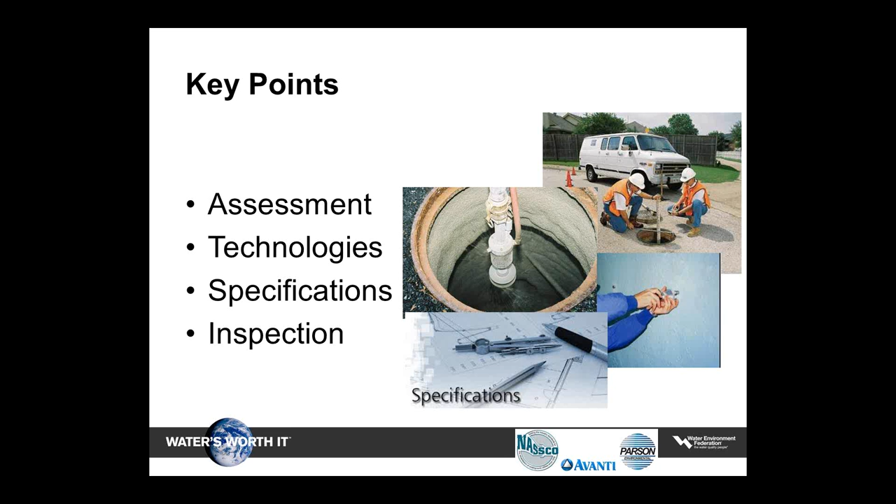That will be followed by 4 experts in manhole rehabilitation technologies to discuss some of the predominant rehab technologies available in the market today. We'll then move to the importance of good manhole rehab specifications, emphasizing some of the important components of a good specification. Now, following this webcast, you'll be provided instructions on how to download your own free copy of NASSCO's specification guidelines, which was developed by our own Manhole Rehabilitation Committee, some of which you're going to hear from today. And finally, the perfect specification is really not worth the paper it's written on if it's not thoroughly executed. So we'll wrap up the webinar with a presentation of key components of construction inspection for manhole rehabilitation.

Now, our presenters this afternoon will include John Schroeder from CDM Smith to discuss manhole assessment. For manhole rehabilitation technologies, you'll hear from Frank Aguilar from Avanti International, Craig Gall from Parson Environmental Products, Jim Creed of Sherwin-Williams Company, and John Manajak of National Power Rodding, a Carylon Corporation. Tim Back from Back Municipal Consulting will discuss the specification guidelines that were developed by NASSCO's Manhole Rehabilitation Committee under his leadership. And finally, Gerry Muenchmeyer, NASSCO's Technical Director, will explain some of the unique inspection techniques that are required for successful manhole rehabilitation projects.

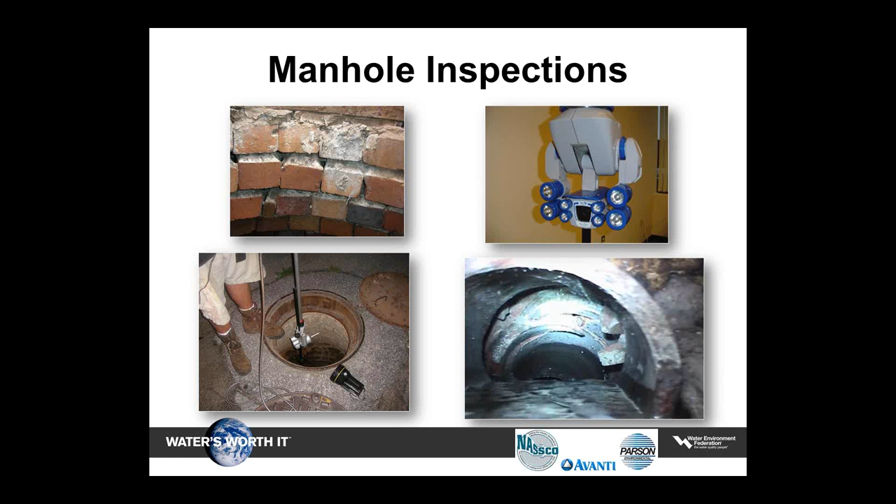As with everything else in the trenchless industry, it's constantly changing, and there's new and innovative trenchless technologies that come out every year that allow us to collect better, faster, more detailed data. And what you see here is just some different snapshots of pole cameras that allow us to collect video and/or photos of the manhole, as well as zooming up inside the pipe. And I personally have used these types of technologies, and it gives us sometimes a good snapshot, zooming up the pipe to see if that pipe is open or clear, or maybe that's blocked or has too much flow in it.

Another technology that has really come a long way in the last couple of years are these panoramic cameras. It allows us to do a very thorough and quick inspection in less than 5 minutes of the entire interior of the manhole, and we can then take that information and actually do full-blown level 2 MACP inspections back in the office, where we complete all the fields by entering all that information into the computer. Again, in 5 minutes you can collect all this information, the video, and then take that information back to the office.

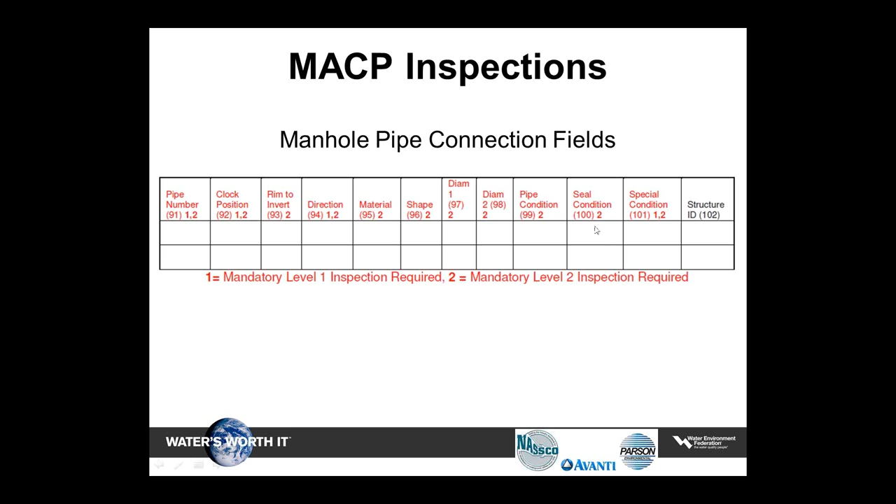The next information that you may collect, especially when you get into level 2 inspections, is information on the pipes coming into and out of the manhole. So we're going to collect information like the clock position, the depth or rim to invert, the material of the pipe, the shape of the pipe, diameters, some general condition, is it good or is it bad, and any type of seal condition.

The defect coding, as I mentioned, we've taken the PACP and really are reusing almost all of the codes that you would see for defects within a pipeline and using those same codes for the manhole. So things like infiltration runner is IR and missing mortar, and we're using those same types of code all the way from the top of the manhole at the cover all the way down to the bottom, which is the channel. And then we also use abbreviations for the cone and the wall and the channel. So we are using those abbreviations to complete this type of defect coding information. And then we will also identify severity of the types of defects and the clock position within the manhole.

So with that information that we're going to collect, we're always trying to figure out, okay, does this manhole need any type of improvements? And if so, what might those improvements be? Also in the field, we utilize a lot of other types of technologies like handheld GPS data collectors that we can pre-populate inspection forms that we can just basically have pull-down menus. We can collect XY coordinates of the manhole location, which we can bring back and put that into our GIS. And we can rapidly collect all this information in 10 to 15 minutes per manhole.

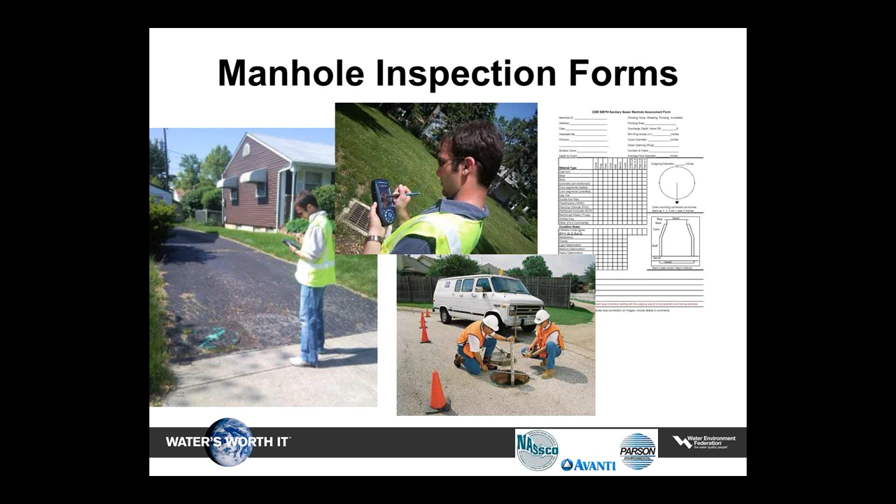Here's a couple of sample manhole inspections that we've done on some recent projects, and I'd like to again reiterate that each project's different. The information that you may need is different, and the MACP kind of gives us just some basic fundamentals of the fields and standardization of an Access database that we can collect all this information in a standard form. Here's a snapshot of some basic information of we're collecting any infiltration, the material, the dimensions, some condition information, and then we typically take several photographs that we can put into this form, and then we can have one file that may be used to, say, link to the GIS. It's important to be able to collect this information efficiently, so that's really why we've collected these pull-down things. We can check off what the material and condition is for each component of the manhole.

The information you might get with a MACP database, an Exchange database, there's a lot of information that's collected, and you're going to get this type of information. Here's a sample MACP Exchange database, and the key table that you get, all these are individual tables, but the key table that you're going to have all your summary information is the manhole inspection table.

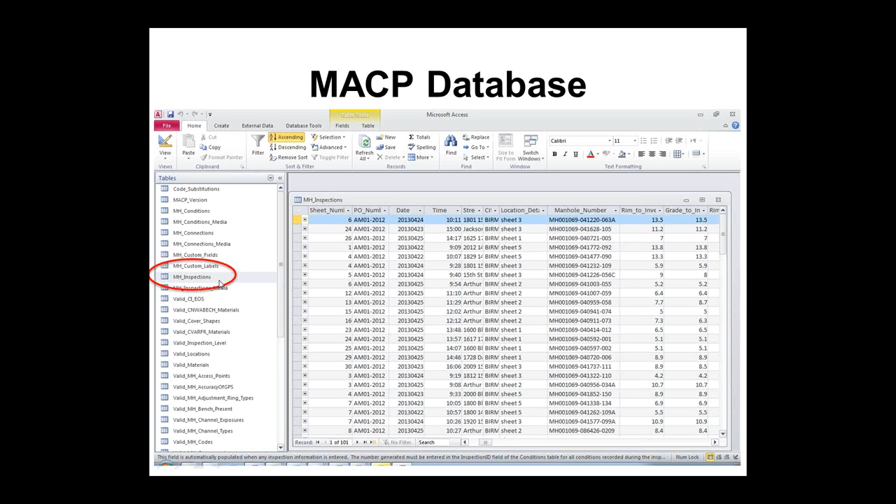Yeah, thanks a lot, John. In this next segment, you're going to hear from 4 industry experts in manhole rehabilitation technologies. Now, the first of our speakers will be Frank Aguilar, Vice President of Operations and Customer Service at Avanti International. He'll discuss chemical grouting in manholes. Frank has experience with R&D, technical support, vendor management, and international sales. He also speaks 4 languages fluently.

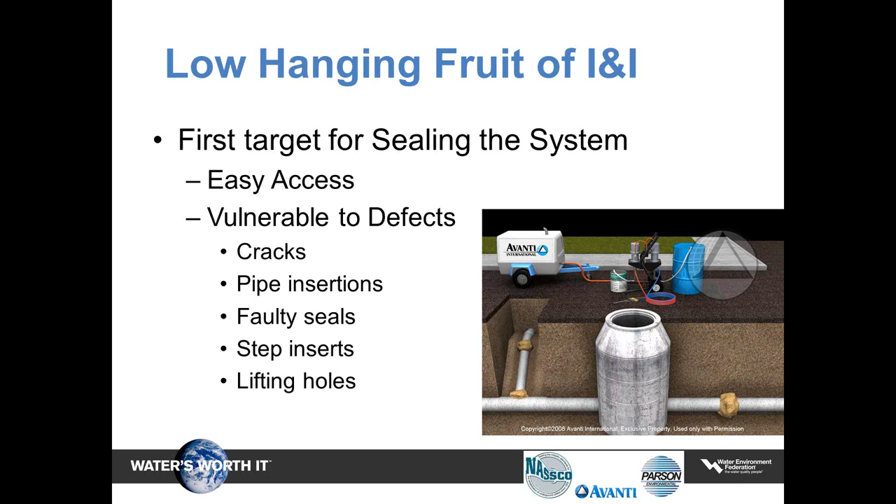The main types of manholes serviced by chemical grouts are brick and mortar and precast manholes. Over time, the mortar slowly erodes away, exposing the manhole to leaks. And in the precast concrete manholes, the gaskets are rolled or torn during installation, creating an entry area for infiltration.

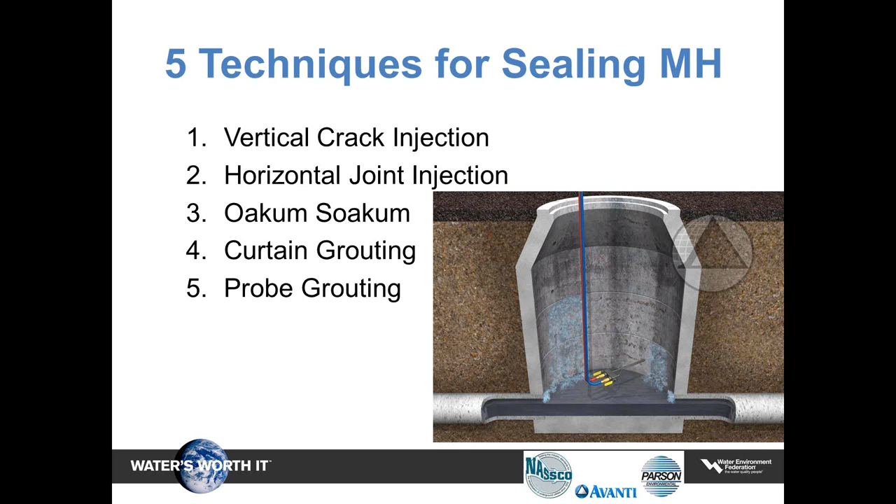Let's review a number of techniques for sealing leaking manholes: vertical crack injection, horizontal joint injection, oakum soakum, curtain grouting, and probe grouting. The following animations will help us understand what can be done to stop leaks in a manhole permanently.

In this vertical crack injection animation, you see the leaking manhole, you see the water coming in, you see that injection holes are being drilled from typically the lowest point. You drill at a 45-degree angle toward the crack, a distance off the crack equal to about half the wall thickness. You would typically drill on either side of the crack. You would then flush the cracks with water to remove any debris and then install the injector.

The injector is placed and tightened into the wall structure. Using a grout pump, you set the pump at its lowest possible pressure. Then you would connect the coupler to the injector. You would begin pumping grout until the crack stops accepting the material. The process continues. He works his way up. As you can see, the water is slowed down until there is no more water coming through the manhole wall.

In the horizontal joint injection animation, you see the leaking manhole. Injection holes are drilled in a horizontal pattern. You would then again flush the cracks with water to remove any debris and then install the injector. You're not trying to drill all the way through the structure wall, so again, keeping in mind the thickness of the wall is important.

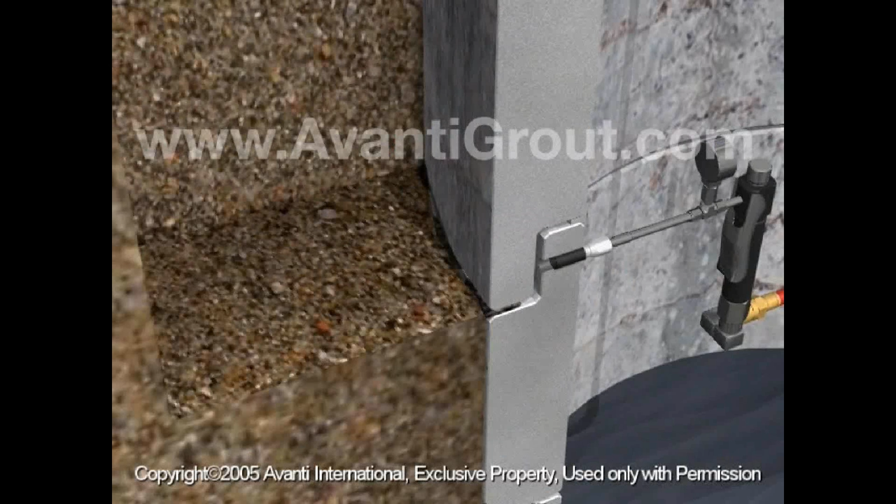You would then install the injector in place. Using a grout pump, you would set the pump at its lowest possible pressure, then connect the coupler to the injector. You begin pumping grout until the area stops accepting the material. In the final phase of the animation, you see the grout traveling. You see the next grouting area being injected, and you see the grout travel to the other side.

In the oakum-soakum animation, we see a wall that is leaking. You see the oakum rope and you see the grout pail. Typically, the grout is mixed into the oakum rope to keep the grout in place as you put the mixture into the leaking area. After you place it in the leaking area, the material will expand, it adheres, and compresses against the sides of the structure, stopping the leak.

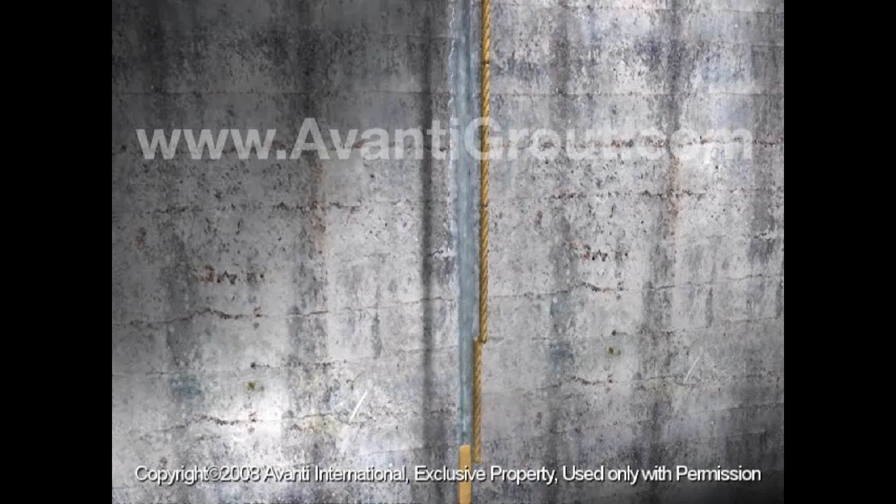Sometimes the manhole has too many leaks to effectively treat each individually. In that case, it can be curtain grouted. In the curtain grouting animation, we utilize a brick manhole that is leaking. We observe a grout probe that is injecting grout all the way through the manhole wall out into the surrounding soil. The process is stabilizing the soil and creating a permanent curtain outside the underground structure.

The process is continued again from the lowest point up, and you see in the animation how the grout is forming a mixture with the soil matrix, stopping the water.

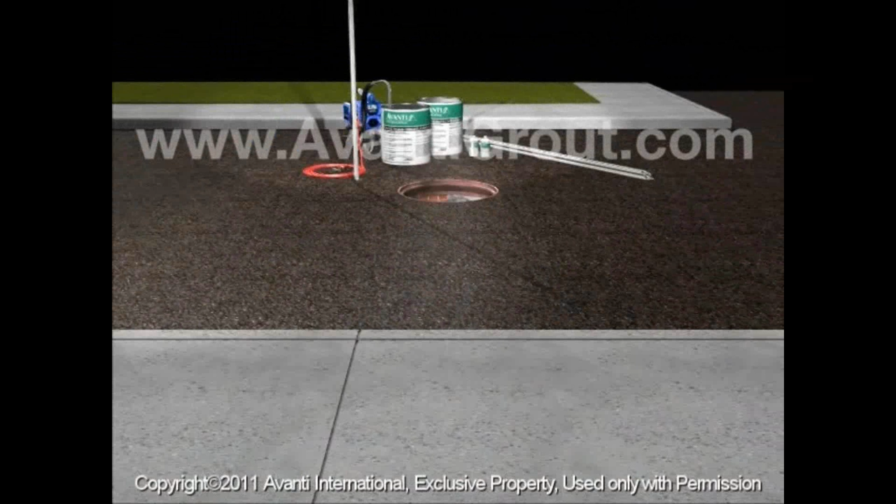The last technique we will review is probe grouting. This approach may be warranted if there are too many types of utilities in the manhole, say, or if you have very limited access. The animation shows how a contractor may perform the work in a brick manhole. The probe may be jetted with water pressure or high pressure air to the depth desired.

Install all probes in the area to be grouted. Ensure that the probes are fitted with the appropriate fittings for a proper connection. Each injection pass will receive about 1/4 gallon of material depending on the soil type. After the desired amount of grout is injected, stop pumping and pull the probe up approximately 2 feet. Inject again using the same technique. Continue the process until the probe is within 3 to 5 feet of the surface of the ground.

These techniques are at times the first wave of defense before other technologies can be used. Today we've reviewed techniques which are long-term solutions for leaking manholes and our aging infrastructure.

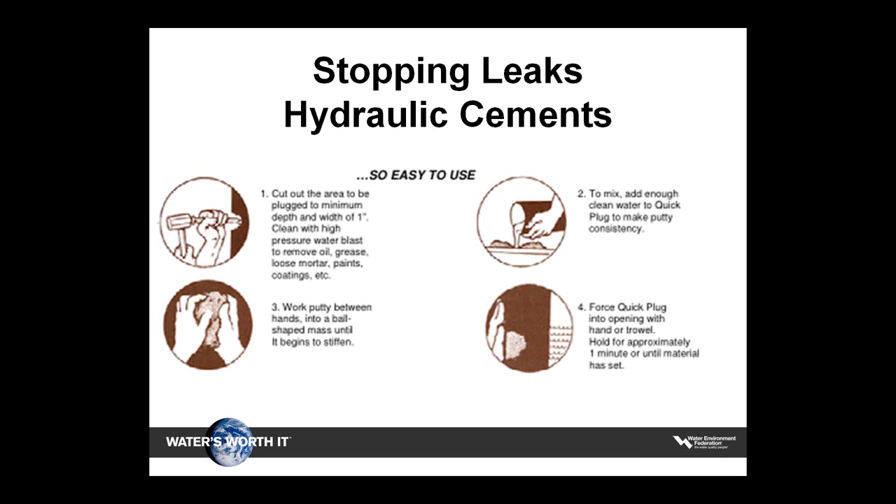Cementitious patching materials can be used to fill in gaps, voids, or holes that may be excessively deep prior to installation of the cementitious lining. Most of the manufacturers offer this type of product that is compatible with their lining material. This is an important point to consider when placing more than one surface bonding product in the same manhole. Set times for patching materials are usually in the 30-minute range.

Cementitious lining materials designed for manhole rehab are typically manufactured from either Portland or calcium aluminate cements. Even so, all of the products using either type of cement are designed to provide structural integrity, protection against future infiltration, and corrosion resistance of varying levels, which we will discuss later. Compressive strengths are typically 4 to 5 times greater than the existing manhole substrate, which will return the manhole to better than new condition by providing a higher level of structural integrity. They are usually fiber reinforced to aid in resisting surface cracking and require around 1 to 1.25 gallons of water per bag, with bag sizes ranging from 50 to 75 pounds.

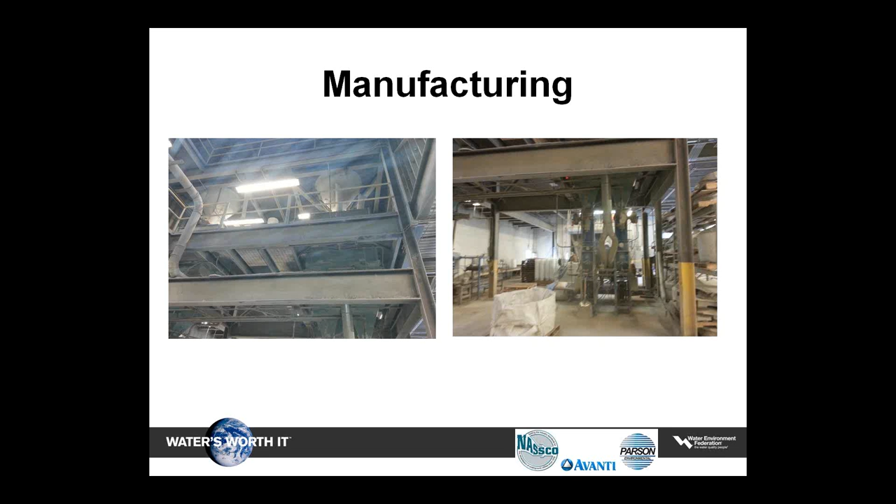The products have very good adhesion to the manhole substrate, along with internal cohesion that allow for vertical and overhead applications without the use of wire mesh or other supporting materials. Each manufacturer has their own design philosophies, which are reflected in their proprietary formulations that determine how their particular product will mix, spray, and finish. However, the products manufactured within each cement group will typically possess similar physical properties and long-term performance. Just as Fords and Chevys are manufactured by different companies and take their own approaches to certain aspects of their vehicles, they're both designed to get you from point A to point B.

Wet shotcrete spraying, either by gun or spin caster, is the most common application method for these products, but most can also be applied by trowel if necessary. Recommended application thickness is a minimum of 1/2 inch, which can be increased depending upon the product's capabilities, along with engineering design parameters that may be part of the project specifications. The products are finished using a steel trowel to compact the material and close up the pore structure. A subsequent brush finish is optional and may be performed if desired.

Common types of these products include Portland cement with aggregate, which is typically a fine-grained sand; calcium aluminate cement with select aggregate; calcium aluminate cement with calcium aluminate aggregate, which is referred to as clinker, and it is a byproduct from the processing of the calcium aluminate cement; and also Portland or calcium aluminate cement-based products with a liquid additive to prevent growth of bacteria that causes microbial-induced corrosion, or MIC.

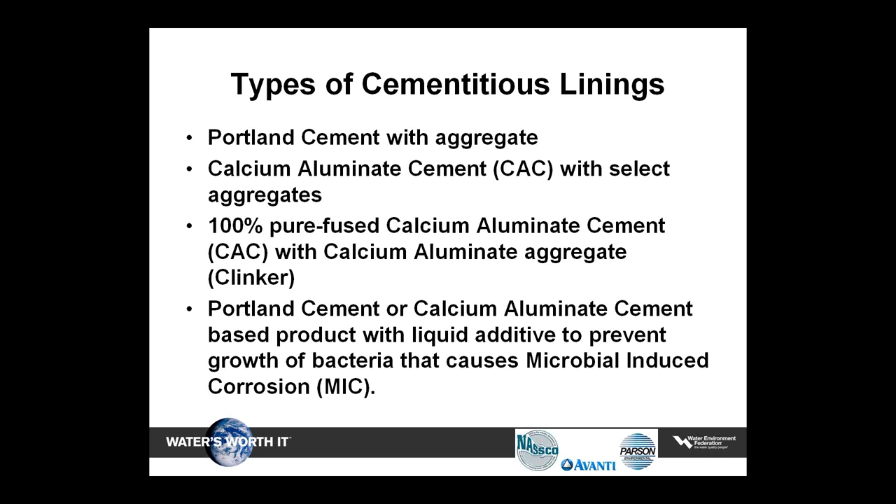Portland cement-based products will usually exhibit the longest working times. This type of product can typically be applied at a thicker rate per coat than calcium aluminate-based products. The 28-day compressive strengths are typically a bit higher than the calcium aluminate materials, which gain strength much earlier in the cycle and then tend to move upward more slowly.

Portland cement-based linings may be the most commonly utilized cementitious linings due to a lower cost, acceptable corrosion resistance for a majority of environments, and a more user-friendly application due in part to the extended working times.

Calcium aluminate cement with select aggregate products usually have a reduced working time versus Portland cement due to the increased internal heat that is naturally generated by the calcium aluminate cement. And as the ambient temperatures increase, that working time may be reduced even further. Corrosion resistance is enhanced to a moderate level, and it is usually at a mid-range price point. These products tend to be a little more difficult to handle versus Portland cement due in part to working time constraints, but factory-trained contractors are capable of installing the products properly.

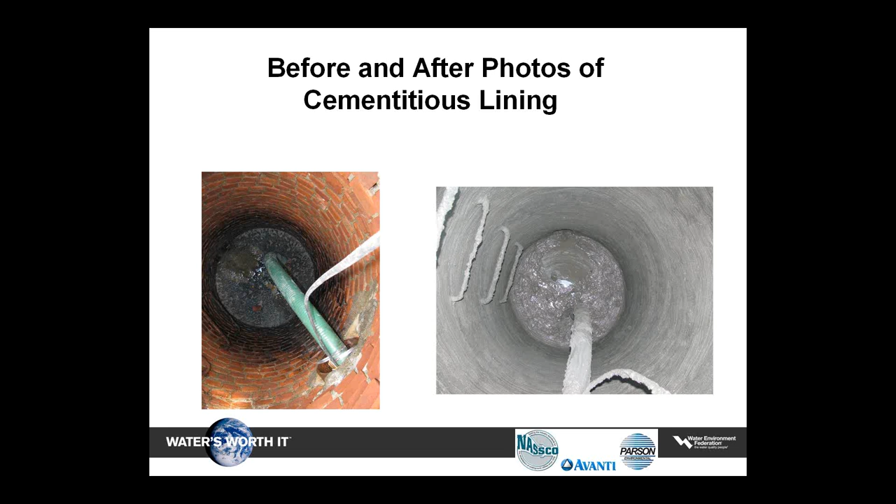100% pure fused calcium aluminate cement with calcium aluminate aggregate products arguably have the highest resistance to corrosion due to the addition of calcium aluminate aggregate, which is much harder than sand. The product has similar working time characteristics to calcium aluminate. There are only several manufacturers that can provide this type of product, however, as calcium aluminate aggregate is difficult to obtain.

Portland cement or calcium aluminate cement base with a liquid additive introduced during the mixing process can eliminate the growth of microbial-induced corrosion, or MIC, which is a primary cause of corrosion in manholes. It guards against the growth of mold, fungi, algae, and other unwanted bacteria, which in turn does not allow damaging sulfuric acid to be produced. Also, it remains a permanent part of the concrete matrix.

Famous concrete structures include the Hoover Dam, the Panama Canal, and the Roman Pantheon. The earliest large-scale users of concrete technology were the ancient Romans, and concrete was widely used in the Roman Empire. The Colosseum in Rome was built largely of concrete, and the concrete dome of the Pantheon is the world's largest. After the Roman Empire collapsed, use of concrete became rare until the technology was repioneered in the mid-19th century. Today, concrete is the most widely used man-made construction material.

Sprayable high-build cementitious linings have revolutionized the manhole rehabilitation industry over the past 25 years or so and taken it to a new level of long-term sustainability. Providing structural integrity is becoming more and more important as our already old infrastructure continues to age. Cement has been used in some of the world's oldest structures that are still standing today. Manholes lined with any of the cementitious products discussed here today should be around long after all of us are just a memory.

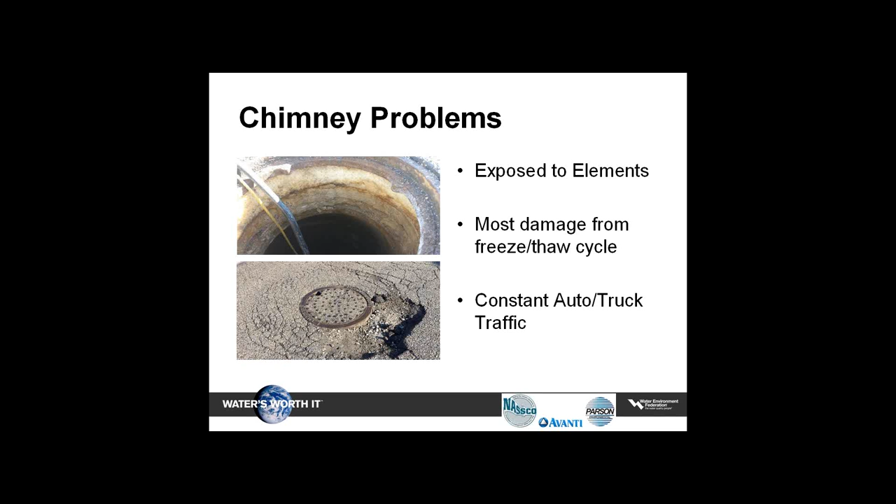Our most common problems occur because the chimney is so close to the surface. Chimneys and the material that makes up the chimney are exposed to the elements, especially when we have an open grate manhole cover like those that are used in storm inlets and catch basins. The chimney is where we find the most damage from the freeze-thaw cycle. Manholes located in the streets experience damage to the chimneys from the constant pounding from car and truck traffic.

With the constant pounding of traffic and the yearly freeze and thaw cycles, chimneys are prone to infiltration because of the breakdown of their material. It is said that about 50% of the initial inflow from a rain event occurs at the chimney area.

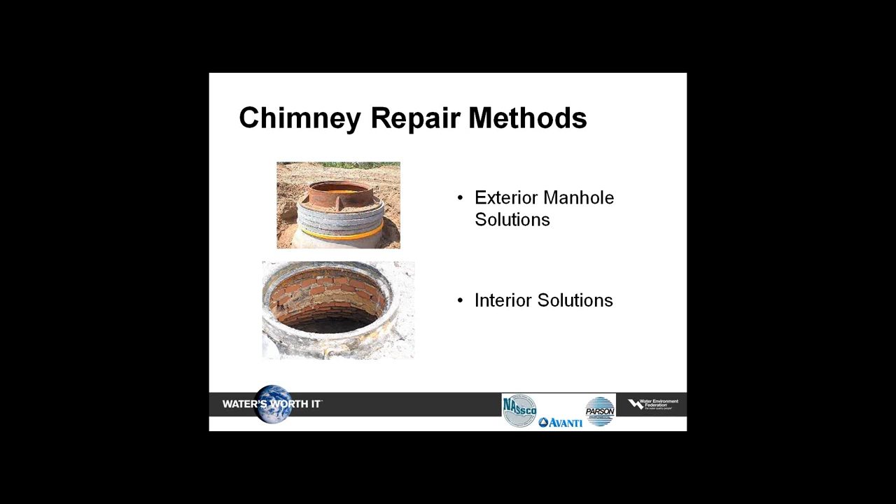Chimney repairs can be categorized as either exterior solutions or interior solutions. Exterior solutions require an excavation, or they must be installed during construction prior to leveling the surface. The interior solutions, or ones that don't require a dig, can be installed from the surface, and about 75% of the time they do not even require a manned entry.

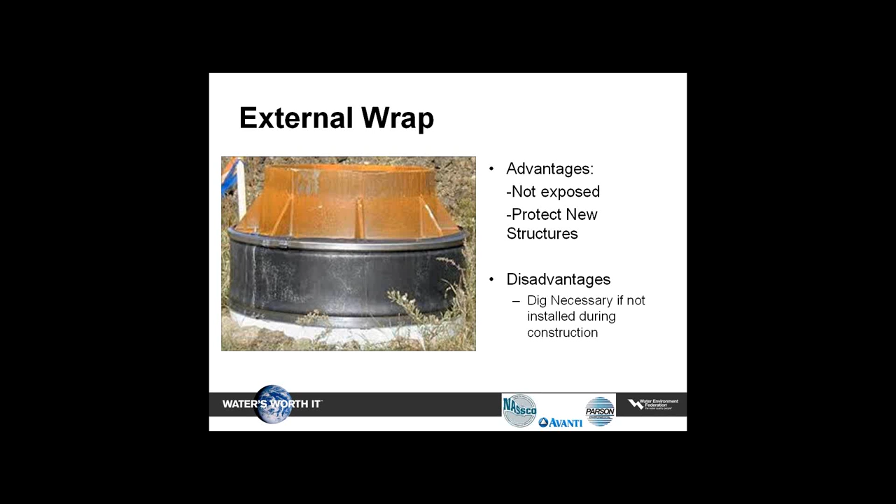The external wrap is best installed when adjusting frames or during new construction. These help protect from infiltration from the outside and are held in place by the metal bands.

Moving inside, the first thing that I think about when I hear about a chimney seal are the internal boots. This is a rubber ring of various diameters that is installed against the frame and extends downward to the corbel area. They're held in place by stainless steel bands that lock in place. They are best used if you have a fairly even ring size for the length of the chimney. However, they do give you a little bit of stretch. So if you have a 22-inch ring and a 23-inch ring in the same chimney, the boots will be able to cover both sizes.

Chemical grouting is performed in the same manner as manhole grouting. The operator will drill through the wall and inject the chemical grout to form an external chimney seal. This can also be performed from the surface down by drilling through the ground and injecting from above.

The newest type of chimney seals are hand-applied or sprayed-on chimney seals. These are used when you have irregular chimney sizes or oddly shaped ones such as those that you may find in the square inlet boxes. These will give you about a 500% elongation and are chemically resistant to road salts.

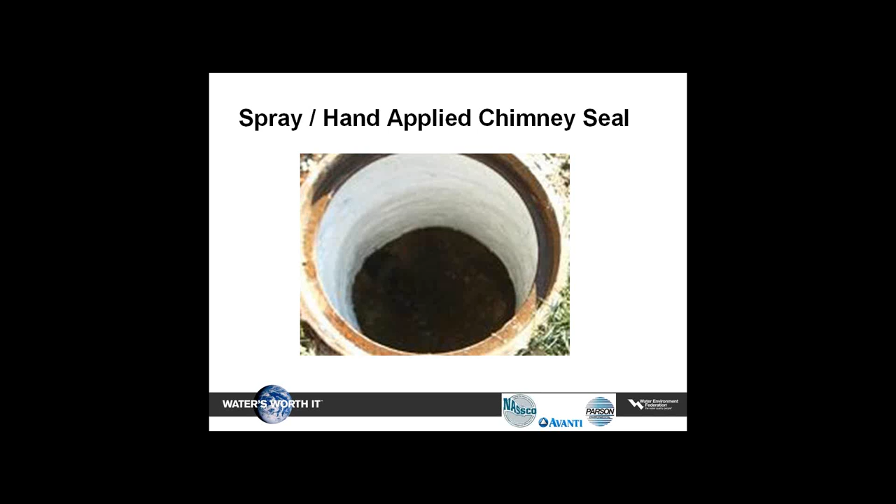And finally, to wrap things up, chimneys are the area of the manhole that is most exposed to the elements. Because of the constant pounding of traffic, they are prone to material breakdown and movement. Repairs can be made using internal or external solutions. These solutions will help eliminate infiltration and inflow and help protect against the road salts.

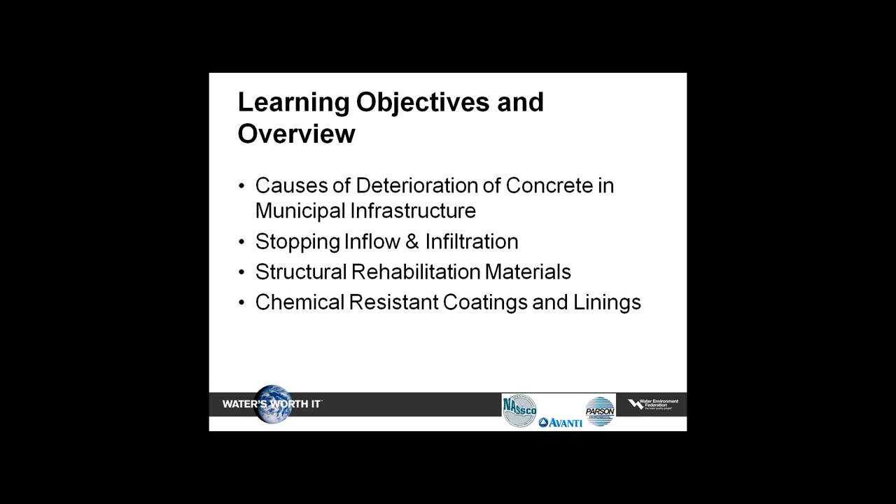The learning objectives and overviews that we wanted to talk about today were causes of deterioration in concrete municipal infrastructure, reducing or stopping the inflow and infiltration, structural rehabilitation, the materials, as well as the chemical resistant coatings and linings that are being used today.

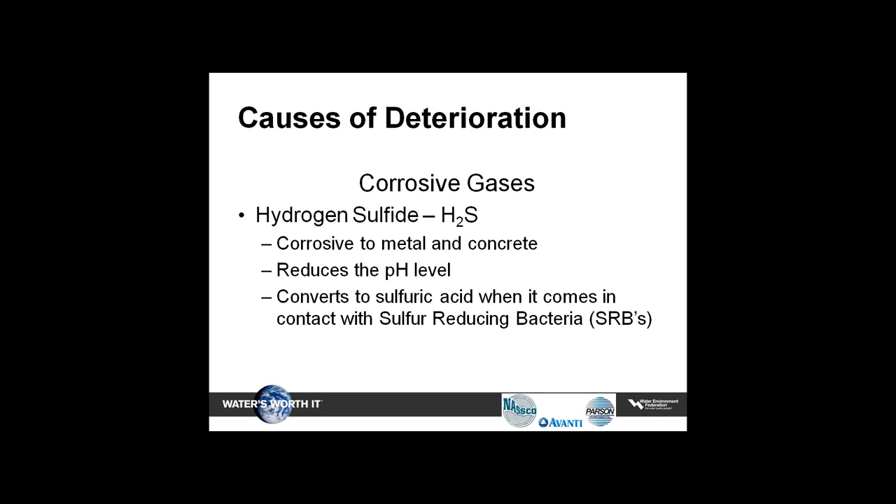Some of the corrosive gases that we come across are obviously hydrogen sulfide. It's corrosive to metal and concrete. It reduces the pH level, and it converts to sulfuric acid when it comes in contact with sulfur-reducing bacteria. Another gas is carbon dioxide. It's slow deterioration of the substrate. It's naturally occurring, and it acts to reduce the pH of the substrate, and it leads to carbonated concrete.

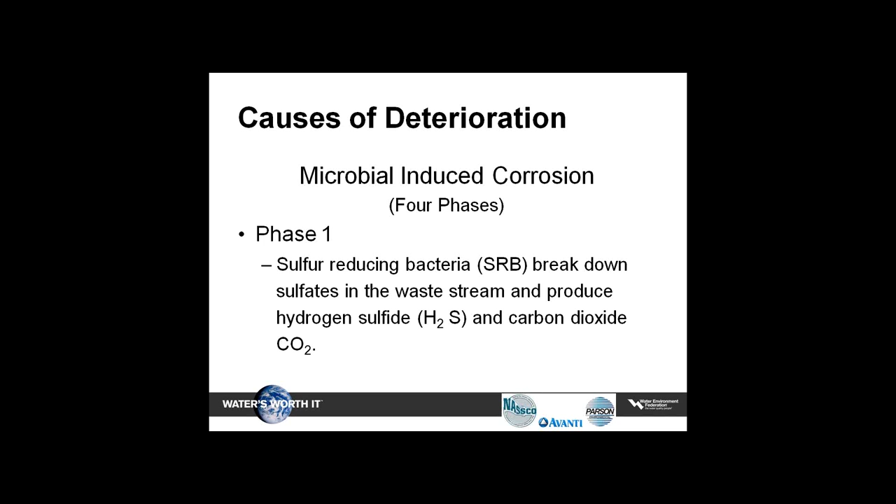There's generally 4 phases of MIC. Phase 1, sulfur-reducing bacteria break down sulfates in the waste stream and produce hydrogen sulfide as well as carbon dioxide. Not something that's visible. Neither one of the first 3 phases are visible. Phase 2 is where these acidic gases and carbon dioxide act to reduce the pH of concrete from approximately 12 to as low as 9. And these sulfur-oxidizing bacteria attach to the surface as sulfates are produced.

Phase 3, these SOBs are known as Thiobacillus thiooxidans. They consume H2S and discharge sulfuric acid. The pH continues to drop, and the microbial growth accelerates, creating more and more acids. Phase 4 is where we generally see the corrosion. The acid attack of the concrete layers creates gypsum. These organisms continue to reproduce, additional acid is produced, and then there's eventual structure failure.

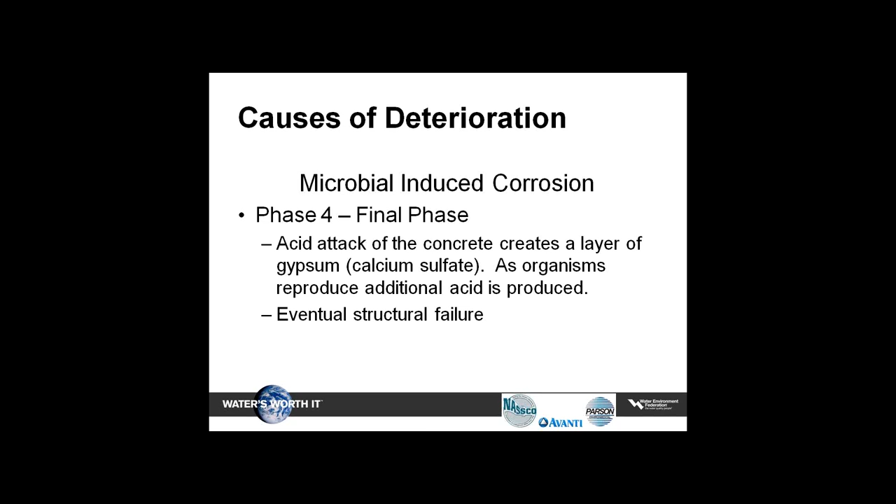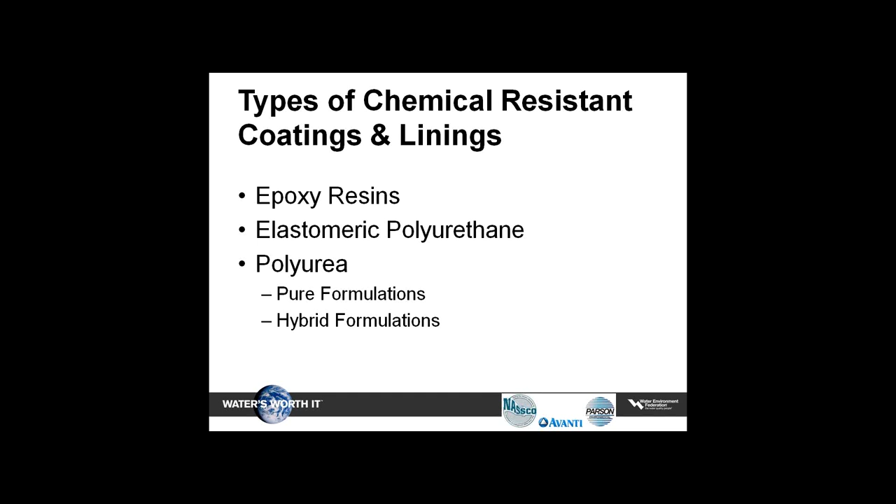Let's talk about the types of chemical resistance coatings and linings. There's epoxy resins, elastomeric polyurethanes, and polyureas in both pure and hybrid formulations. Epoxy-based resin linings have been used and have been the industry standard since we began lining manholes. Again, they're not the cure-all or fix, and every coating should be considered based on the structure, location used, and then the environment during application.

Some of the pros of these epoxies are they are moisture tolerant. They go to surface saturated conditions. A very high film build, 125 to 250 mils or up to 1/4 of an inch. Very high strength, very low or no odor. They're generally 100% solids. They are very chemical resistant. They come in variable formulations, and the resins can be hot potted or applied very quickly through standard equipment or through plural component spray. These epoxies can also be made into mortars and hand troweled into place.

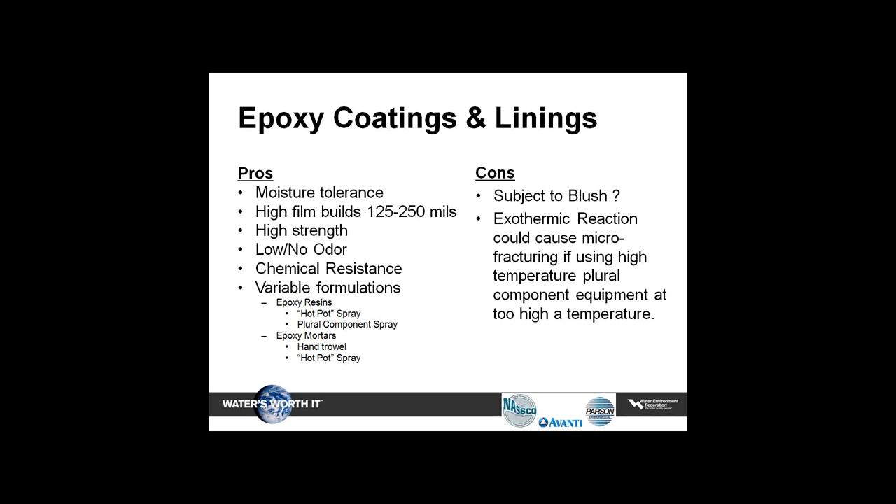The cons of these linings, well, subject to blush. There's certain constituents in this product that create a waxy film on the surface. That doesn't really matter, it's in a manhole. The exothermic reaction, though, if the materials are applied too hot, they are going to cause a cracking or a brittleness of the film.

Talking about polyurethane coatings and linings, the pros are flexibility. They're very flexible, 50, 60% elongation. There's also rigidity in their film, which is kind of an oxymoron with something flexible also being rigid. It can be hand applied with certain technology, but it has very good elongation, fast cure times, and very good abrasion resistance. And again, up to a 1/4 inch or high film builds.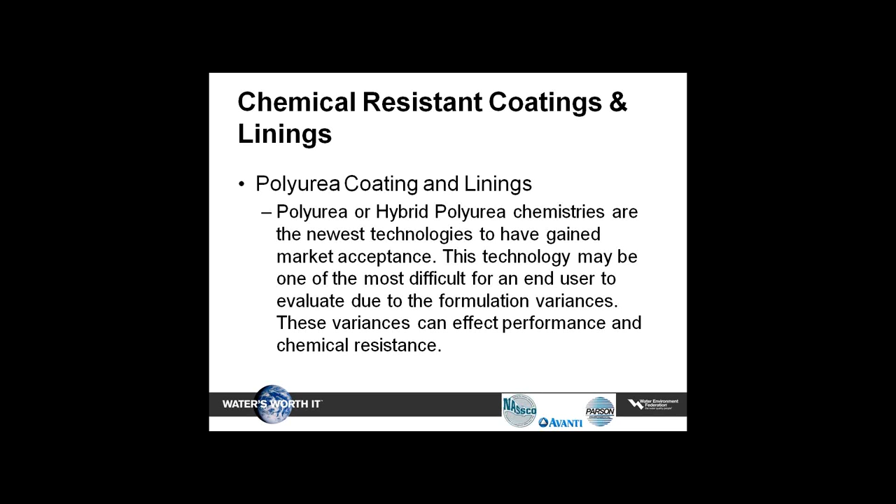Polyurea coatings and linings, they've been the newest technology, but they've been around for a while. It's really hard to evaluate. There's so many different formulations. The formulations can also affect the chemical resistance of the coatings. The pros are they're very fast drying. Again, very high film builds.

They're used for linings, chimney seals. They're physically tough, very good abrasion resistance, very good elongation up to 530%. And on the back side, they don't tolerate moisture at all. They must be applied with plural component, which is sometimes bulky, although there has been some robotic plural component in the market. Some have very poor chemical resistance for the most part, but again, that depends on the formulation. High tensile strength, and generally a primer is always required.

And in summary, there's numerous products and methods that are available for lining and rehabilitation of sewer infrastructure. These physical performance characteristics, they vary greatly across these various and numerous chemistries. Products should be selected based on the need of the end user. And uniform monolithic films definitely aid in the prevention of chemical attack.

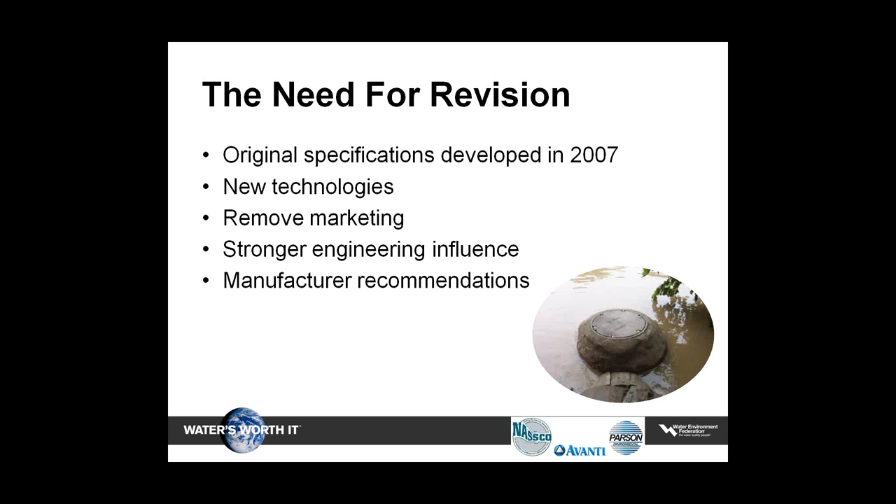A couple of key items were in need of revision. There were items in the specification that were just marketing based. They also saw them require more engineering into the design. In addition, they wanted to emphasize that the manufacturers are the experts and the recommendations should be followed. The new version of the specifications was developed by members of the Manhole Rehab Committee. This included 4 engineering firms, 7 manufacturers, and 2 contractors, and took about a year to finalize. The rehabilitation of manholes can be complicated, and the selection of the correct product or technology can at times be confusing.

There are many methods available for rehabilitation of manholes. Each method must be evaluated to determine its applicability to provide the correct solution for the best available price. The following are some of the manhole rehabilitation components covered in this specification and also in this webinar: chemical grouting, cementitious manhole restoration, polymers such as epoxies, polyurethanes, and polyureas, cured-in-place liners, panel liners, chimney seals, and bench

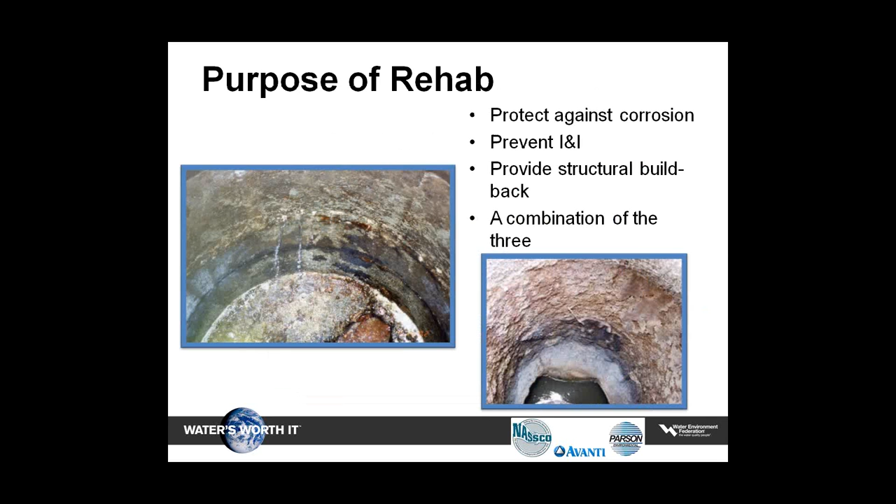and channel inserts. The purpose of manhole rehabilitation is to protect the manhole structure against corrosion, seal it from I&I, rebuild it structurally, or a combination of all 3. One of the items contained in the specification is that the system manufacturer must submit to the owner a minimum of 14 calendar days in advance of the bid date all required product information to obtain pre-approval system status.

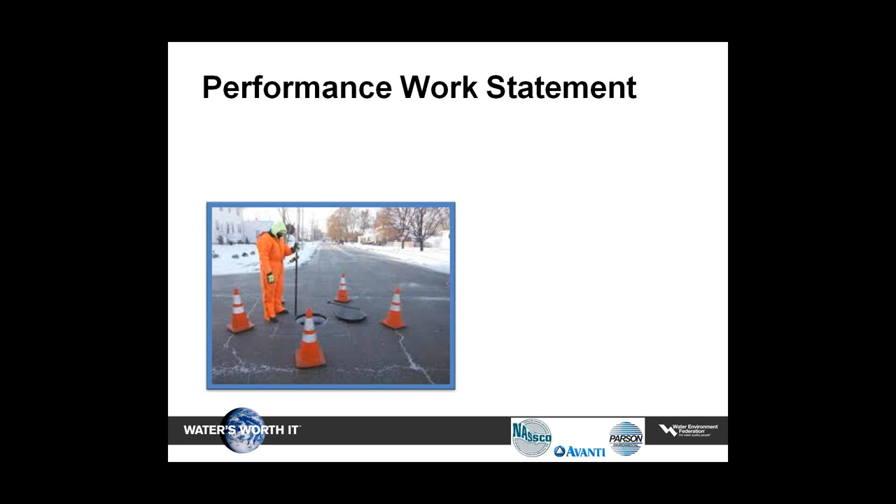The contractor shall submit a performance work statement at the pre-construction meeting. The performance work statement shall at a minimum contain the following. Certify at the time of bid that the designated manholes were visited, inspected, and evaluated by the contractor. A detailed installation plan describing all preparation work, cleaning operations, pre-inspections, bypass pumping, traffic control, the installation procedures, method of curing, quality control, testing to be performed, final inspection, and warranties. A detailed installation schedule shall be prepared and submitted.

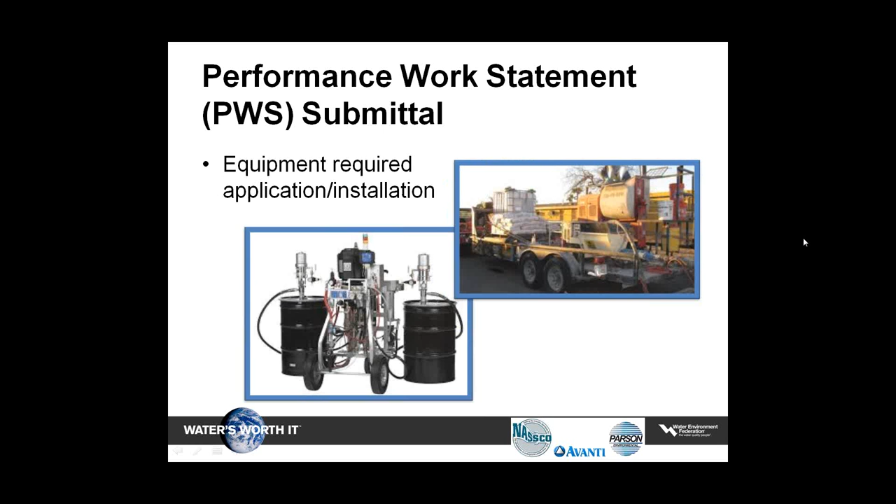The contractor's experience for each type of rehabilitation component, the name and experience of each lead individual performing work of each component. All tools and equipment required for a complete installation. The performance work statement shall identify which tools and equipment will be redundant on the job site in the event of equipment breakdown. A detailed description of the contractor's proposed procedures for cleaning and preparing the manhole structure shall be submitted. The contractor will describe in detail what substrate testing will be performed by the contractor to verify acceptability of the system material to be applied.

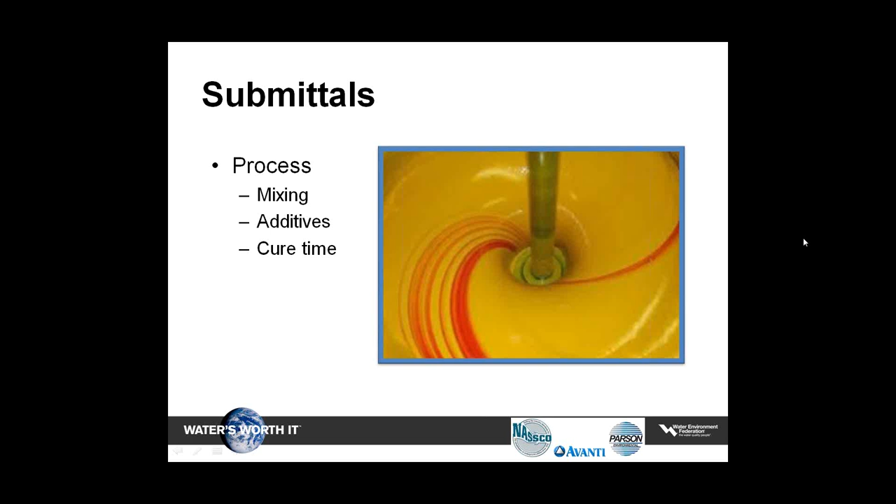The system material type and manufacturer to be used, including catalog data sheets, ASTM references, material composition, manufacturer recommended specifications, component physical properties, and chemical resistance, and detailed description of the recommended procedures for handling and storing materials. Manufacturer's detailed description of the recommended material installation or application process, including mixing, additives, set time, cure time, and the return to service, all shall be submitted. Manufacturer's detailed description of all required field testing processes and procedures. Copies of independent testing performed on the rehabilitation component indicating that the product meets the requirements of the manufacturer's design.

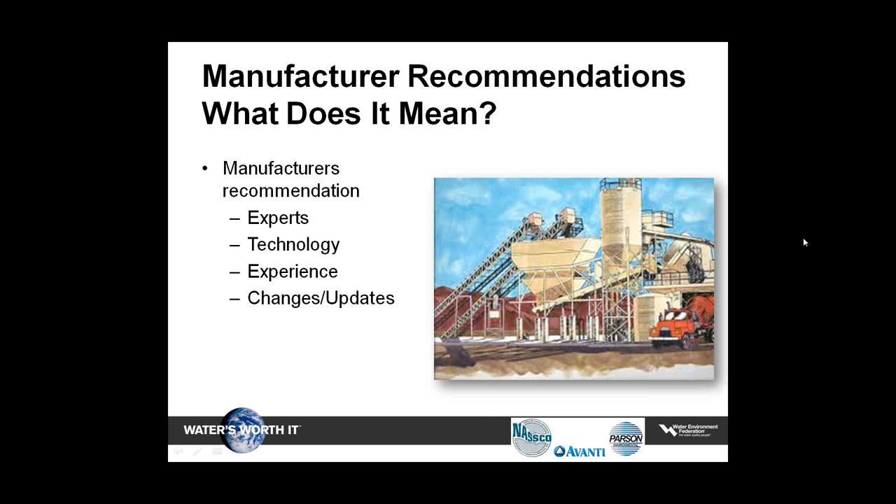Manufacturers are the experts of their technology. They are typically the ones that keep up to date with advancements in raw materials that apply to their technology. They are the ones with the most experience with their product and are familiar with the changes. Their recommendations should be strictly adhered to. The contractor is required to have the following minimum experience: 1,000 vertical feet in the previous 3-year period, 3 successful years of installation, 5 recent verifiable references using the same material that's proposed.

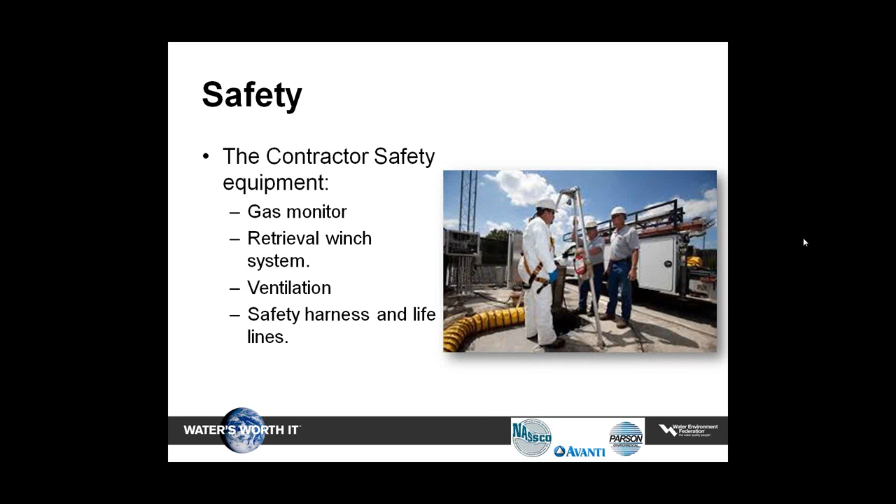A detailed quality assurance plan shall be submitted to the owner. It must contain a detailed description of the proposed quality controls to be performed by the contractor. Contractor safety needs to be a little bit more than what these guys are doing. At a minimum, the contractor shall have on the job site at all times a gas monitor, a confined space access and retrieval winch system, safety harness and lifelines, ventilation fans, and supplied air respirator if needed.

The manufacturer and contractor shall warrant the system to be free from defects in raw materials for 1 year after the installation or from the date of acceptance by the owner. The owner shall perform at its own cost warranty inspections with its own personnel or personnel independent of the installation contractor. 10% of manholes rehabilitated shall be inspected at locations randomly selected by the owner. No infiltration or inflow shall be visible.

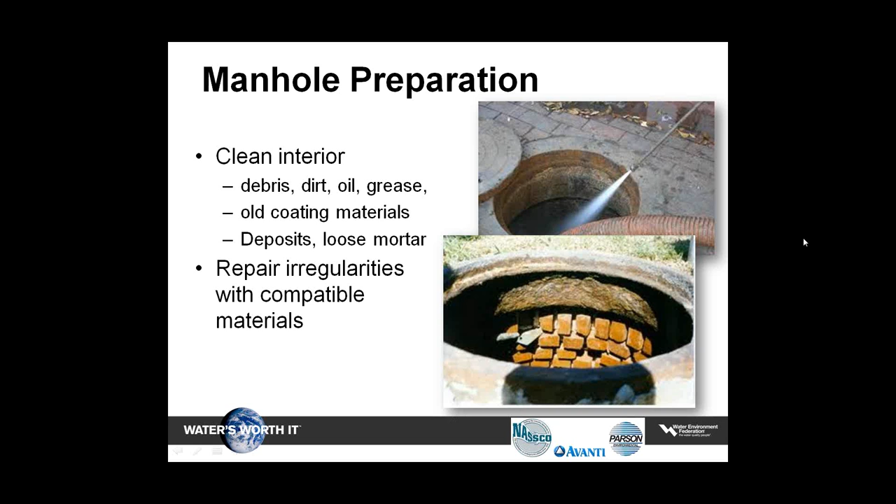Preparation of the manhole must include cleaning the interior surfaces of the manhole to eliminate debris, dirt, oil, grease, and remains of old coatings. Remove loose mortar and concrete. Pressure washing levels used for cleaning shall be as recommended by the manufacturer, and also repair irregularities in the manhole. Repair leakage in the manhole using materials that are compatible with the proposed resurfacing material. Trim and grout incoming laterals and pipes as required. Remove debris from manhole and incoming sewer connections. Properly dispose of debris and residue from cleaning and other construction operations in a manner satisfactory to the owner. And remove the steps flush.

I'm going to cover just a few items for some of the technology. Most of that has been covered in previous sessions. For grouting, ASTM 2414, standard practice for sealing sewer manholes using chemical grouting, should be followed. Grout typically shall be injected through the lowest holes first. The injection holes shall be cleaned and patched.

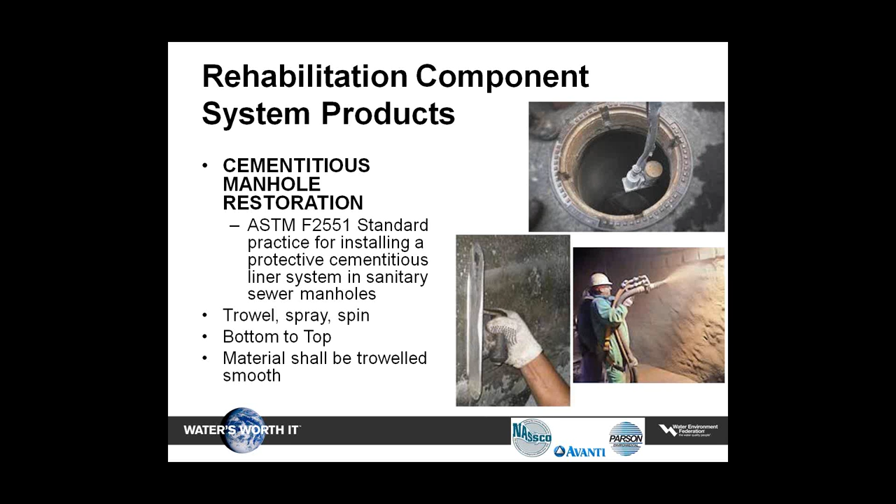For cementitious manhole restoration, ASTM 2551 shall be followed. Product shall be applied using equipment specifically designed for troweling, low-pressure spray, or spin casting. All cementitious liners shall be troweled to densify and smooth out the surfaces.

For polymer systems, strict adherence to the manufacturer's installation procedures shall be followed. Product may be troweled, sprayed, or spin cast. Manufacturer shall determine the recoat window.

Cured-in-place liners can either be pre-made liners or tube liners. Pre-made liners are custom fabricated and can accommodate a variety of manhole shapes and sizes. The tube liner system includes a constant diameter tube that is stretched to fit a range of manhole sizes and lengths.

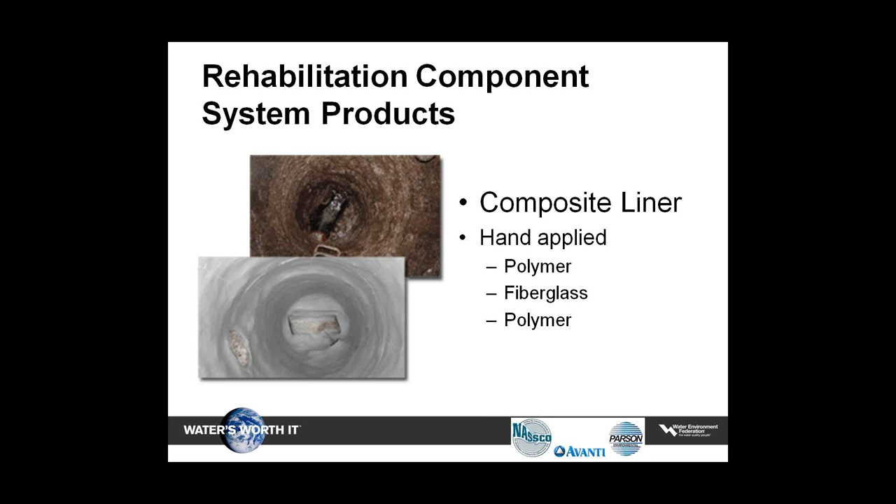Composite liners shall be a multi-layered composite comprised of layers of epoxy and fiberglass, handcrafted and constructed in place and cured at ambient temperatures. Fiberglass must be overlapped a minimum of 3 inches. Each of these products must be installed according to the manufacturer's recommendations for chimney seals.

Systems may be designed to rehabilitate the existing manhole against corrosion, I&I, structural buildback, or a combination of the three. If a manhole is specified to be structurally renewed and able to sustain all earth, hydrostatic, and dynamic loading without support of the existing structure, certification and submission of design calculations by a registered professional engineer is required.

If a manhole is specified to be structurally rebuilt with buildback materials or rehabilitated to sustain hydrostatic loading by groundwater, certification and submission of design calculations by a registered professional engineer is also required. All design must be supported by third-party testing and documentation for the exact product that is being submitted.

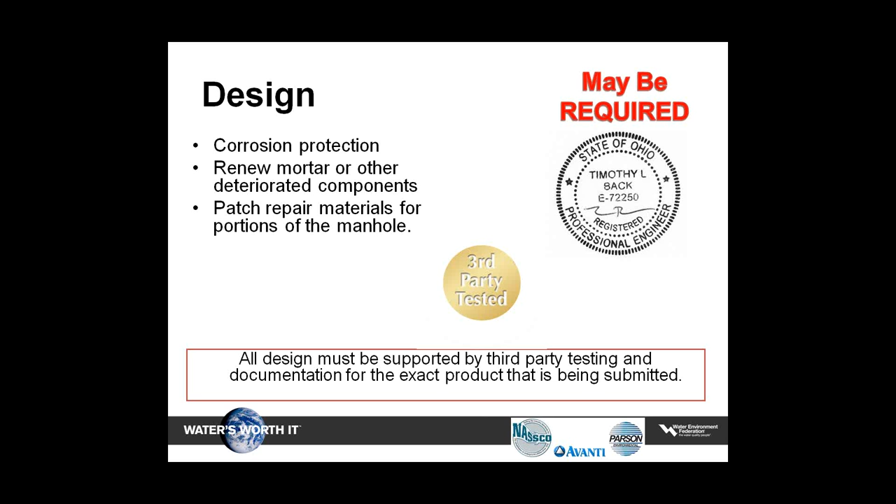If a manhole is specified to receive a corrosion protection coating sufficiently thick to totally protect the existing host structure from further corrosion, deterioration, and water vapor transmission, certification and submission of design calculations by a registered engineer may be required.

Some of the quality assurance and testing measures require the contractor and owner to keep a chain of custody. The contractor shall perform all testing in the presence of the owner's representative. 10% of the installed systems shall be tested. If more than 5% of the tested systems fail the test, then an additional 10% of the manholes are selected for further testing. This process continues until the systems tested meet the requirements.

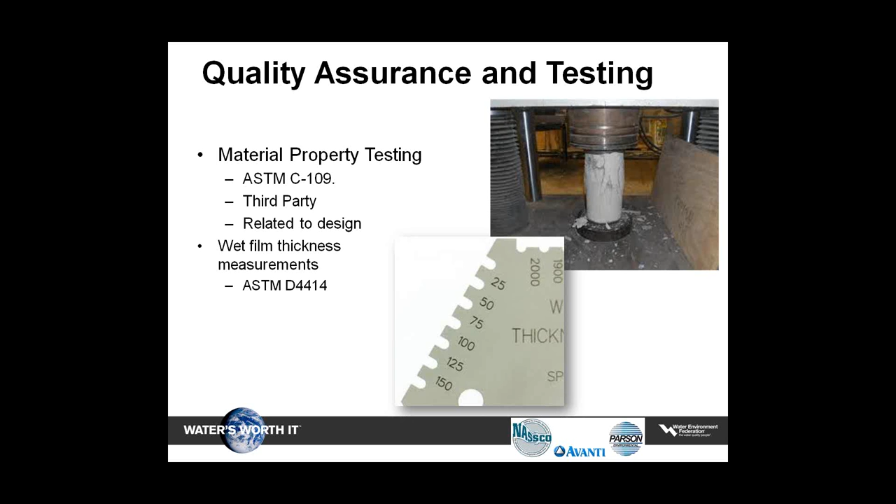All manholes shall be visually inspected. Any leakage into the manhole and areas where the systems were installed by the contractor shall be identified. ASTM C109 shall be performed on cementitious products. During the application, a wet film thickness gauge, meaning ASTM D4414, shall be used to determine thickness.

If the entire manhole, including invert and pipe penetrations, is rehabilitated to as-new condition, then a vacuum test may be performed according to ASTM C1244. If the vacuum test fails, then the contractor shall spray the entire manhole with a soap solution and retest. Inspector shall determine if failure was due to improper rehabilitation, poor pipe condition, or improperly seated plugs.

If the inspector determines that the failure is due to improper rehabilitation, then the contractor shall repair according to the manufacturer recommendations and retest until a successful vacuum test is achieved. If the inspector determines that the failure was due to poor condition of the pipes or annular space between the pipe and the pipe liner, or the inability to seat plugs properly, and that there are no visible defects in the applied product, then it will be determined that the manhole has passed.

Where specified, a minimum of 10% of the manholes coated shall be tested for adhesion of the coating to the substrate. Testing shall be conducted in accordance with one of the following: ASTM D4541, D7234, or NACE SP0188. Owner's representative shall select the manhole to be tested. Holiday detection shall be performed for all coatings installed in corrosive environments. All touch-up and repair procedures shall follow the coating manufacturer's recommendation and then be retested.

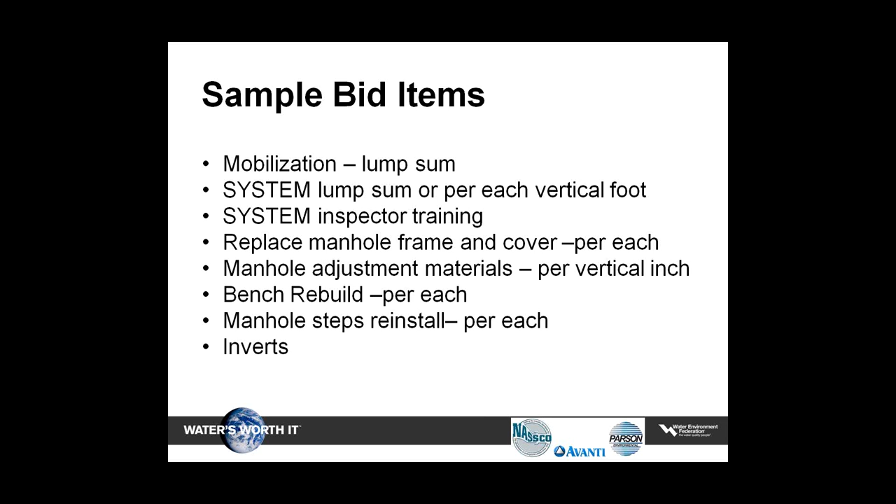And in summary, the specifications contain less marketing. It is focused on manufacturer knows best, requires third-party testing, and engineer stamped designs.

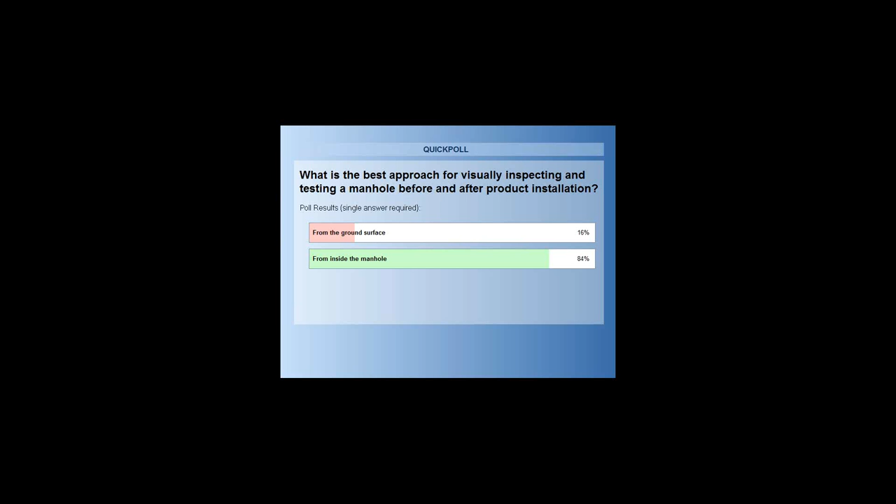The question is, what is the best approach for visually inspecting and testing a manhole before and after product installation? And the options are from the ground surface or from inside the manhole. We have about 30% of people voted, so I'll keep it open for a few more seconds. All right, I'll go ahead and launch those results for you, Jerry. Okay. 84% from inside the manhole and 16% from the ground surface. Oh, okay. Well, so let's proceed with my suggestions.

Inspection and testing for manholes, manhole rehabilitation is really necessary. Obviously, it is. Those of you who've been in the industry for a number of years can attest to that. Installation of coatings and linings do require a certain amount of attention out in the field, and it does require a trained inspector to be out there. So the second thing is, does the inspector need to be trained? The answer also is yes. Unfortunately, I've discovered over the last 10 years or so that a lot of people know a lot about everything, but until we've developed these programs for NASSCO, we haven't really provided some in-depth training to the inspector. So yes, the inspector needs to be trained.

So what should the trained inspector be inspecting out there? So we've talked about all these products. Let's talk about some of the details. We can look at pre-application. There's some pre-application things that need to be inspected that are very important. The host structure preparation is probably one of the most important things that an inspector could be looking for, because if the preparation has not been done properly on the manhole, then the long-term design life of that coating will probably be shortened. Host structure surface condition, such as testing it for pH, moisture conditions, and applied material quality. So there are things that can be done during pre-application.

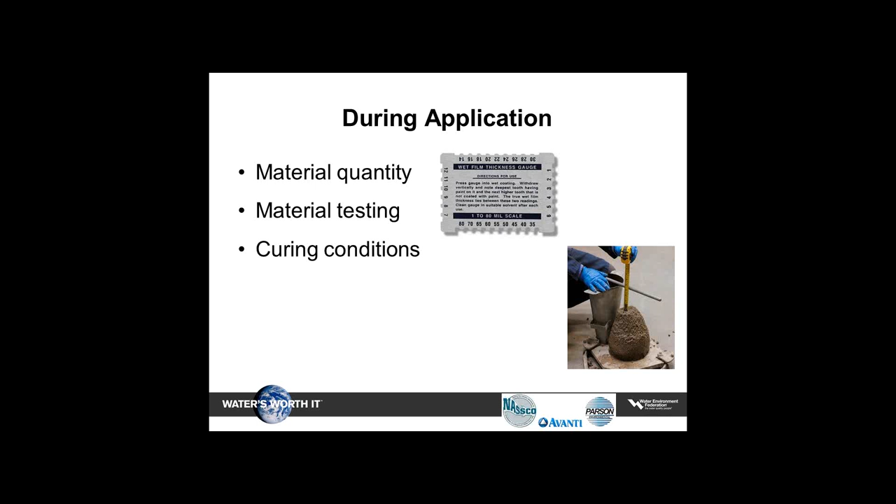During application, we can look at material quantity, checking of the quantity. We can do some material testing. And we can also, of course, inspect the curing conditions under which the material is being applied. I think Jim mentioned there's a big disparity in coatings, whether it's totally dry or whether it's surface dry condition, or is it water tolerant, such as some cement. So these are important things that an inspector can actually check during the application.

And after the application, the visual quality, the thickness that was applied, if it was not measured during the application, it needs to be measured after application. Adhesion to the host structure. Is it supposed to bond to the host structure? Well, we need to test that.

Monolithic application talks about putting on a lining or coating that is completely defect-free. It encapsulates the entire structure in the case of manholes from the inside. And then, of course, any leakage testing that can be done after the application to make sure there's no inflow or infiltration coming in after the rehabilitation is complete.

So we've talked about some of the forces already that affect a manhole. We have external I&I. The inflow affects the manhole a little different than the infiltration, but they both affect a manhole and how it functions. External soil loading, external live or dynamic loading, those that are in streets or airports or in areas where they may have some fairly heavy loading, those all affect how a manhole will function.

And of course the internal corrosion and erosion, which by the way will probably become more serious as time goes on, only because of the large program we're undergoing right now of removing clean water out of our collection systems. There's big impetus on that, EPA consent decrees and things of that nature. So I suspect corrosion is going to be even more of a major factor in the future, because the sewage will be much more concentrated.

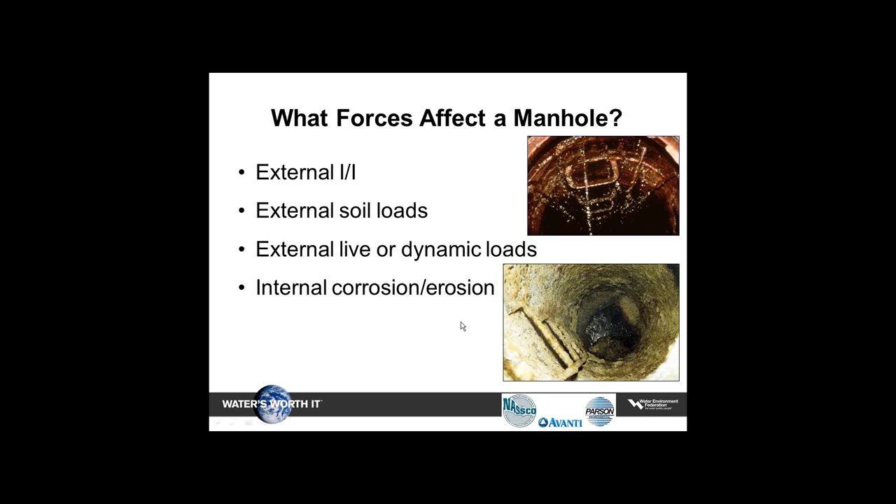So the methods, we've already talked about the methods. I won't go into detail, just a quick summary. Grouting, cementitious, polymer coatings, cured in place linings, panel linings, and there's replacement techniques of components, and of course slipping in a replacement vertical component into the existing manhole as a full structural replacement. So there are a number of different ways they can be rehabilitated. But each one requires installation quality, and of course, someone out there that has some education, some training on exactly what needs to be done so you can get a long-term product.

Let's talk a little bit about a subject that's commonly discussed in this industry: material bonding. We've got different products that claim different bonding, but what does it really mean? Just as a concept, I'd like to discuss chemical bonding, for instance. Chemical bonding is when a product is applied over its same product, but within what we call a recoat window. It actually will chemically bond to itself. In other words, the molecules will connect up and you will have a chemical bond.

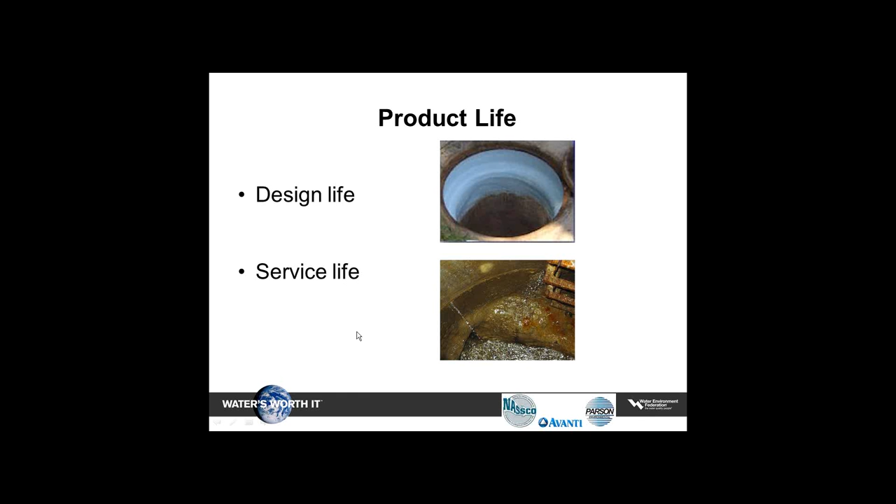Well, the design life is, yeah, the product's there. It hasn't deteriorated. It hasn't corroded. But is it functioning the way it should be functioning? For instance, is it protecting the structure from corrosion? Perhaps. But is it still stopping leakage from coming in? Perhaps or perhaps not. Then the service life has no longer been met if it begins to leak again. So again, these are the things we need to look at while we inspect these projects and make sure that both the design life and the service life are met.

Product inspections need to be measurable, so they need to be specified. The contract specification, as Tim talked about in great detail, needs to specifically define what the inspection requirements will be for infiltration and inflow prevention, structural capabilities including testing, and the bonding capability. If it is a product that is meant to bond to the host structure, then it requires certain inspections, and these are all measurable. Monolithic, which means a coating without any defects or flaws in it, can all be measured. Corrosion resistance can all be measured based on testing and based on certifications from the manufacturers of the products.

So let's talk a little bit about inspection and testing methods commonly used for manhole rehabilitation. What you'll find, there are many procedures out there that are available to the customer. Before rehabilitation, obviously visual inspection, very, very important. Visual inspection should be done, obviously, from inside the manhole, not from the surface.

There's very little that someone can see, particularly vertical parts of the manhole that may be tapered backwards that you can't even see unless you actually go down into the manhole. So visual inspection, extremely important, and this is before the application to inspect the actual surface of the structure before the coating is applied. So this is applicable to all manhole rehabilitation.

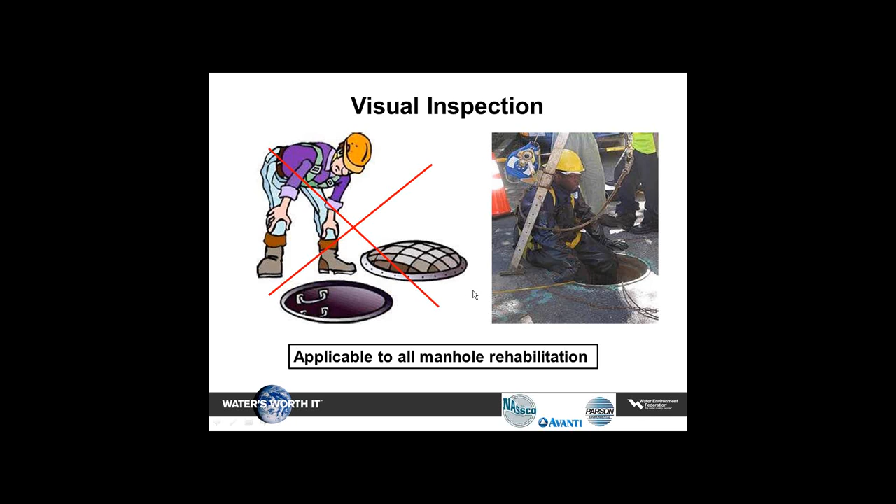Surface preparation inspection, as I said, down in the manhole to affect certain procedures to make sure that there is no loose material remaining on the manhole wall, that the manhole wall has been prepped properly, and it's essentially applicable to all products designed to bond to the host structure.

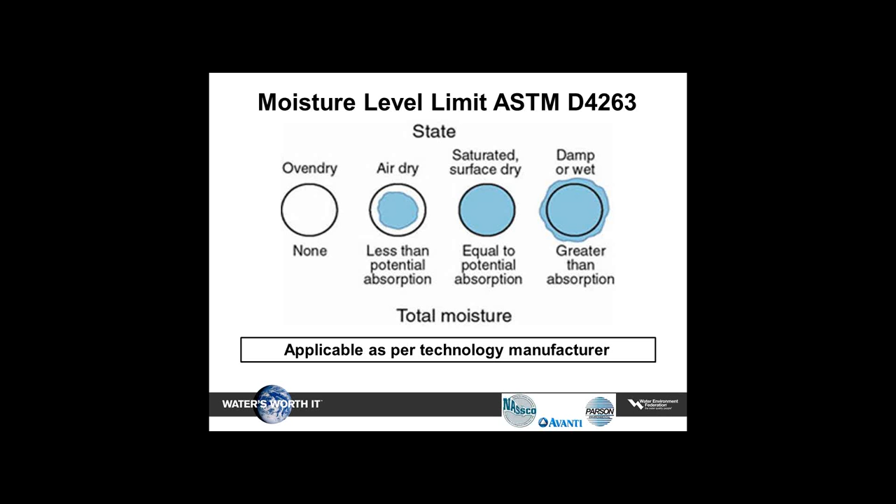We've talked a little bit about moisture levels. This is something that is usually defined by the technology manufacturer, not the applicator. The manufacturer will determine, can this particular product be applied on a damp or wet surface, or does it need to be saturated surface dry, which, as Jim said, feels cold, but it's not wet, or does it need to be perfectly dry, where there's no real cold or moisture at the surface. So different products have different requirements, and these are defined by the manufacturer.

There are such things as water vapor transmission through the wall of the manhole, as per ASTM D4263, and it's usually applicable to thin, mechanically bonded coatings that may be affected by water vapor transmission through the wall. In other words, if there's water coming through the wall, and we can test for those things, then over time that will tend to disbond the coating, and it will begin to peel off. And once it begins to peel off, then of course it'll totally fail over a matter of time.

There are pH tests out there, which is the pH of the concrete wall before the application of the new coating material. And as Jim also said, this is a technique for determining what type of product is best applied. Is it a low pH? Is it a high pH? Does it require a polymer, or does it require a concrete or cement type surfacing? So these are things that can be checked very effectively.

And during manhole application, there are some inspection methods that we can look at. Your material thickness can be measured during the actual application. This is typically applicable to a product that doesn't set up very quickly, such as an epoxy. The gauge has different depth gauges on it that the applicator can actually penetrate into the wall of the coating and give the inspector a reading at any point during the application of what the thickness of that coating is.

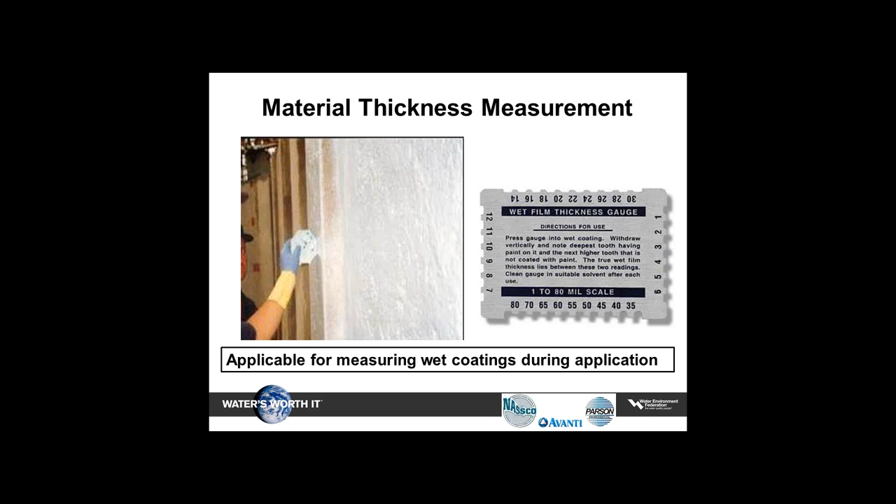And if the coating has a particular specification of, let's say, 120 mils, then he can verify that he's only got 60 on at this point. He has to put another 60 mils onto the wall. So the inspector can have that checked on a periodic basis as the material is being applied.

Your slump tests, pretty common in the industry, very important for cementitious products to make sure that the water-cement ratio is correct, and that can be something that is specified by the manufacturer and then inspected by an inspector by doing a slump test out in the field.

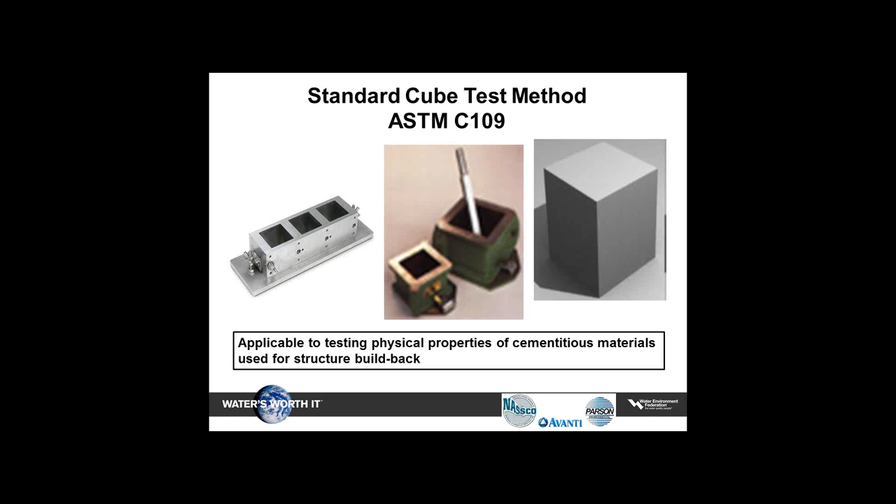Your standard cube testing methods. These are typically methods that are used for cementitious build-back materials, spray-on materials, trowel-on materials, where the material is placed into these small 2x2 cubes. Those are then sent to a laboratory for testing. It is an ASTM C109 recommended standard.

As an alternative to this, some contractors prefer to use cylinder tests, very similar to what we do with concrete when we install concrete. Cylinder tests are defined under ASTM C39. It's an alternative to a cube test. And again, it's applicable to testing the physical properties of a cementitious material used for structure build-back.

So here are some things that should be done on a regular basis to determine that the product is as per specifications and being installed correctly. Grouting, we talked a little bit about grouting. There's a gel test that can be done before the grout is actually injected into the ground.

And this is simply by taking a portion of each of the gel components from the application equipment and doing a quick gel test, which is a matter of pouring one material into the other material and back and forth, and then just basically getting a time on how fast it gels. Very, very simple test out in the field, but it will tell the inspector that, yes, the material at this point in time will gel, and he can document that. So this is applicable for measuring grout gel times prior to application.

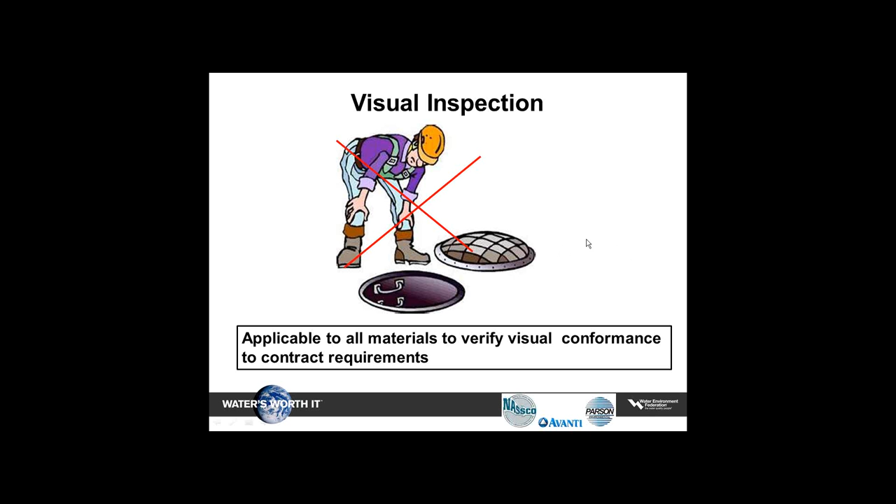And then, of course, there's some things that we can do after the application of the coating. Again, visual inspection. That's a repeat. But we want to look at the finished product. Because no matter whether we do linings or coatings or whatever product we use, we want a final visual inspection. It should be done by an inspector to make sure it meets the requirements, it doesn't have any flaws in it, doesn't have any obvious blemishes or delaminations that would affect the longevity. So applicable to all materials to verify visual conformance to the contract requirements.

The core testing. Core testing is a way of actually removing a small core out of the material that was applied to measure the final thickness. This is a measurable specified requirement in most contracts, and so it can be measured using a core test.

Ultrasonic test is a non-destructive way of testing the thickness of coating. Many contractors use this as opposed to actually cutting a sample out and then having to repair that defect. This is applicable, again, for testing the coating and liner thickness by ultrasonic testing of the installed product. Very, very common way of testing the thickness.

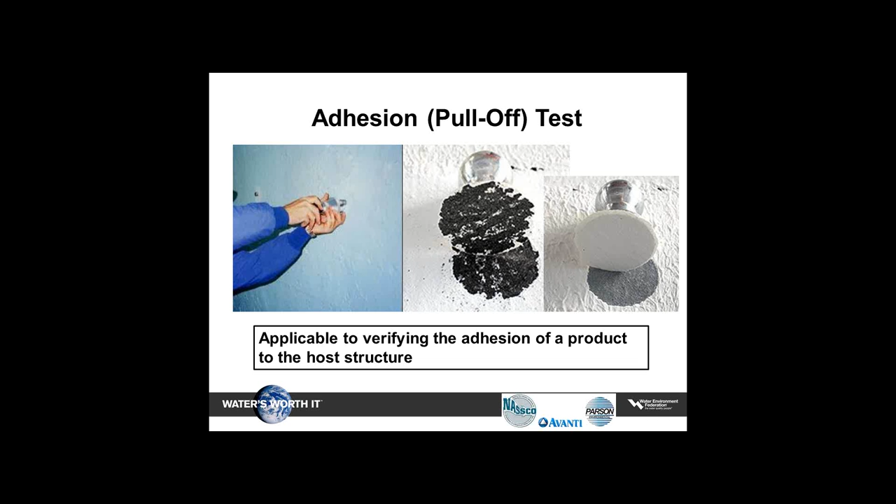And the second one is obvious, where the coating has pulled right off of the substrate and did not bond very well. So we want to test for those things because we want to make sure that the product has adhered properly. If it has adhered properly, you probably have a long-term solution.

Spark testing, we've talked about that. This is pretty common to all technologies. And spark testing will determine if the application has been installed monolithically. In other words, monolithically meaning there are no pinholes or no defects or thin spots or issues in the coating that will cause it to prematurely fail.

Those of you who are familiar with most coatings, if a single spot on a coating begins to deteriorate and the corrosive environment gets under that coating at that point, over time that will find its way under the majority of the coating, and the coating will tend to fail in its entirety. So it's important, for virtually every technology, that they be spark tested to make sure that they are 100% monolithic and have no defects.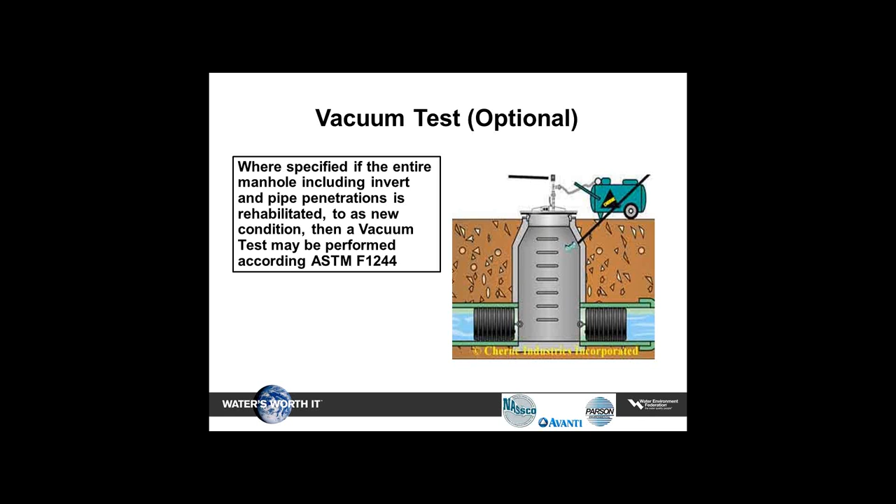Vacuum testing, I think Tim talked about this a little bit. I just want to emphasize vacuum testing was developed for new manhole construction, but where specified, if the entire manhole, including the invert, pipe penetrations, and anything else that has to be fixed on the manhole are properly repaired, then a vacuum test can be performed. A vacuum test should not necessarily be performed if only one component of the manhole is rehabilitated. It needs to be the entire manhole.

Quick summary of the pre-installation of the systems, the test approaches you can use, the during-installation approaches for inspection, and of course after installation. All of those are defined in either a standard or an ASTM, and they are available for the inspector to be able to define and verify that the material has been installed properly.

So in summary, industry standard methods for verifying the quality of the applied products are available for each phase of manhole rehabilitation to provide the trained inspector with the tools to inspect and test the manhole product application. So the tools are there. We need to define them as engineers. We need to define that in the spec and have an inspector out there that then verifies these. With that, I'll turn it back to Ted.

Thanks, Jerry. We're going to jump right into the questions. We've actually got a few general ones I'll mention. They're asking about where to get copies of the specification guidelines that a lot of this is based on. If you get on the NASSCO website, which is nassco.org, under Publications and Specs, you can find copies of the manhole rehabilitation specification guidelines as well as others. So you can actually find that right on the website.

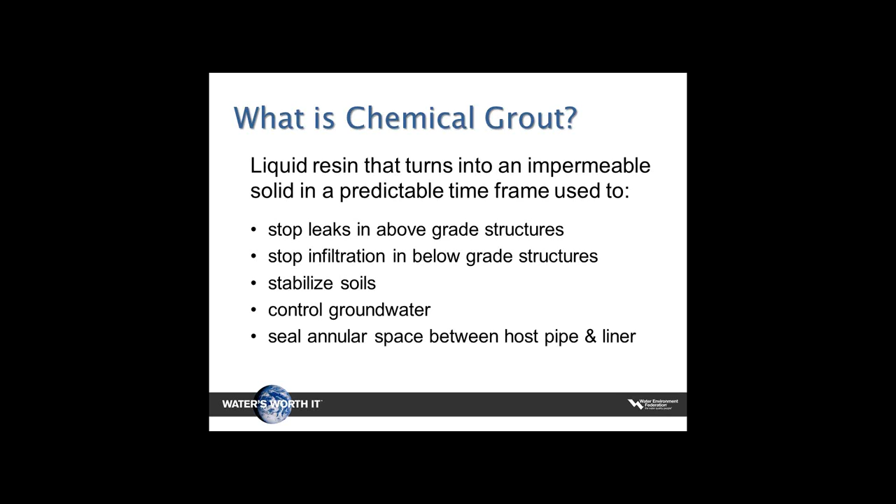Avanti is responsible for dozens of formulas, which each are engineered to perform different tasks. Ingredients can be added to change the outcomes. So this is technology that you can control, and it's technology that you can specify, and what you know absolutely matters. There are 3 grout families: acrylic grouts, polyurethane grouts, cementitious grouts. These are tools in your toolbox.

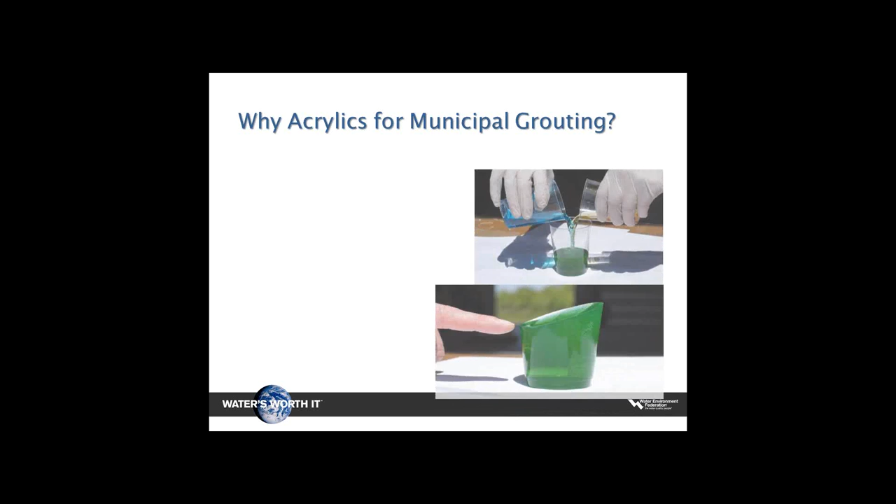But for municipal grouting, by and large, the most significant specification is for acrylics, and for good reasons. It is the thinnest product on the market. There are no suspended solids, which is why we use a gel or a dye oftentimes for Part A and Part B to make sure the pump's working accurately. Field adjustable cure times, field adjustable gel strengths, soap and water cleanup, no activated moisture, no need for solvents, and a very successful track record. In fact, a 60-year track record.

The use of a chemical grout, specifically acrylamide, dates back to the 1950s for soil stabilization. In the 60s, municipalities started using the same grout to stop water leaks in mainline sewers. In 1985, U.S. DOE began an exhaustive study of 7 different grout formulations, and after 60 years, in multiple industries, new uses of chemical grout are on the horizon. This 20-year study from the DOE concluded that the best product to encapsulate radioactive waste is AV-100 acrylamide grout based on its longevity of 362-year half-life in the soil.

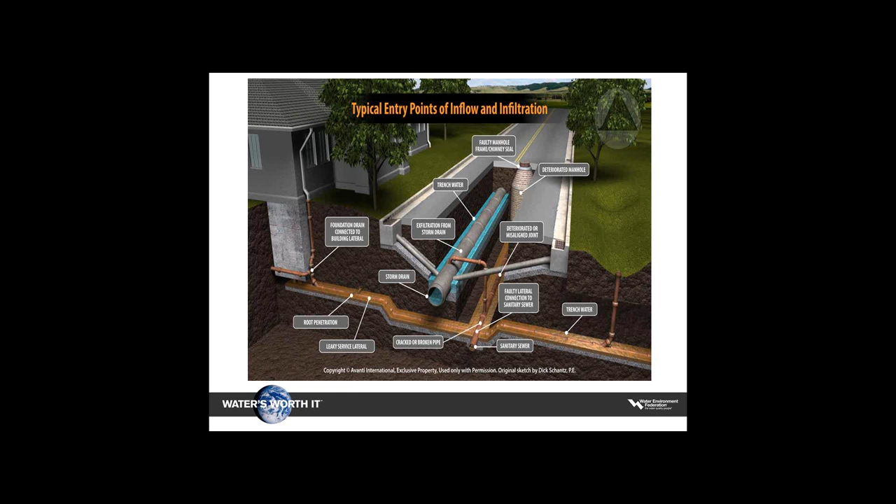Here's an image produced by the EPA in 1990 that shows sources of inflow and infiltration. This is what we've inherited. This updated image shows a deteriorated brick manhole, a faulty lateral connection with the sanitary sewer, as well as a couple suspicious taps on the far left-hand side. Note the relationship between the storm sewer and the sanitary sewer. Let's take a closer look.

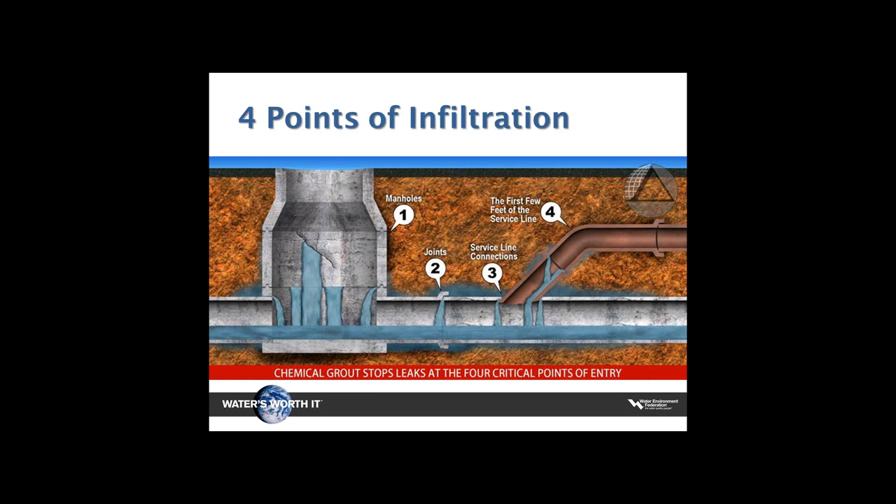Typically, the sanitary sewer runs deeper than the storm. After a rain event, exfiltration occurs and water follows the grade along the bedding, which literally acts as a French drain, channeling storm water toward the sanitary sewer trench. Hydraulic pressure is significant, and the water wants in, or it travels downline to the next manhole. Eliminating water intrusion at the manhole is good, but only part of the solution. If you think like water, you'll flow to the next point of entry, either joints in the main line, lateral connections, or the first few joints in the lateral.

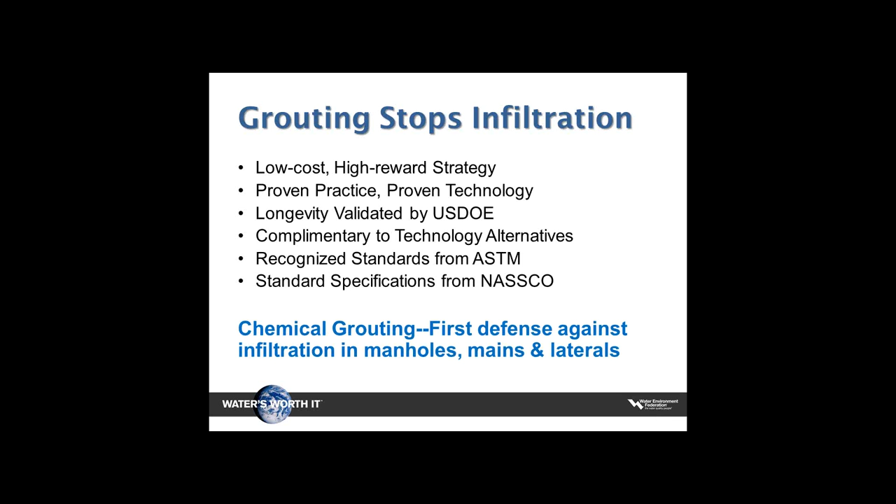If the goal is to eliminate infiltration, chemical grout is the only technology engineered to mitigate groundwater at every point of entry. Here are a few standards from ASTM, and kudos again to NASSCO for driving the adoption of these specs among municipal, contracting, and engineering communities.

As a leading producer of chemical grout for municipalities, Avanti is equally aligned with the cause of proactive maintenance before more expensive structural repair is required. It's the right thing for the ratepayer, for the health and safety of citizens, and the growth of the community. We inherited an infrastructure we can't replace, but we can make it whole for future generations if we stop the vicious cycle of waiting for it to fail.

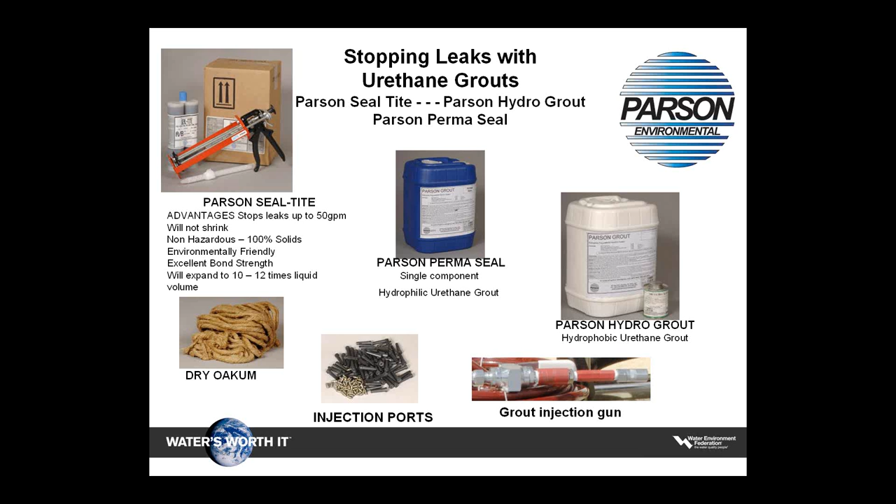For higher volume leaks, we recommend urethane grouts. Parson Seal-Tite is a hydrophobic urethane that is dispensed from a dual caulk gun. It has an initial reaction time of about 5 seconds and can stop active leaks up to 50 gallons per minute. Parson Hydro Grout and Perma Seal are injected through the manhole wall using injection ports and pumping equipment.

Some rehabilitation projects could require repairs to the manhole bench and invert. The repair products need to be easy to apply and set up quickly. Parson RPM is a cementitious product that has a set time of about 30 minutes. It can be used for repairing the invert or patching the bench, as well as other areas in the manhole. Parson Epoxy FS1 is an epoxy coating that is 100% solids, can be brushed onto the invert or bench, and has a set time of about 45 minutes.

By far the best and most cost-effective means of providing structural integrity to either old, poorly constructed, or deteriorated manholes is with the application of a high-strength cementitious lining. Parson offers a complete line of these products that can be hand-applied, gun-sprayed, or spin-cast in place. Parson MH Liner is our Portland cement-based product, microsilica enhanced, fiber reinforced, that can be applied up to 3 inches thick per coat.

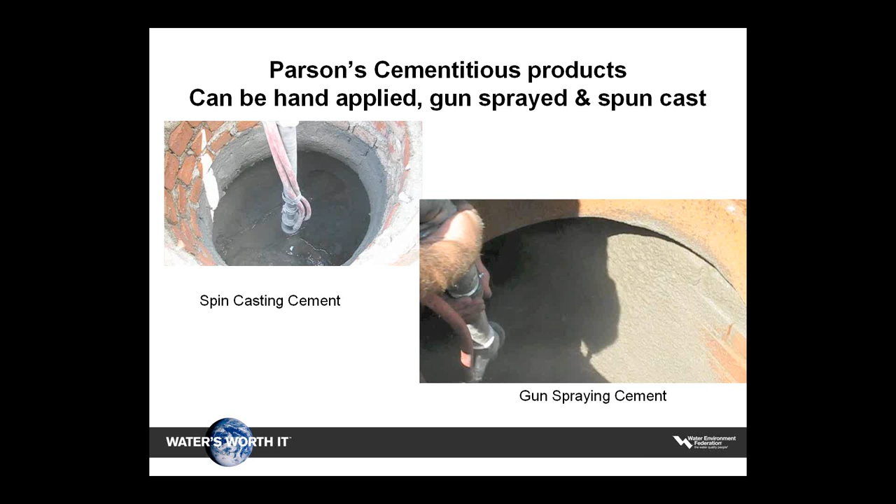Parson CA Liner 100 is a calcium aluminate cement-based lining product for use in lower pH, higher corrosive environments. Parson CA Liner 100 Plus combines calcium aluminate cement with calcium aluminate aggregate to provide an even higher level of protection. Conblock MIC is a liquid additive used with either MH Liner or CA Liner 100 to eliminate microbial-induced corrosion, which is the primary cause of deterioration in manholes. It basically removes the food source for the bacteria, thereby starving them.

Parson Epoxy SCL 80 is a high-build, 100% solids epoxy coating used for corrosion protection. The product can be brush or spray applied up to 80 mils thick in a single coat. Parson Epoxy SCL 80 HB is an ultra-high build, 100% solids epoxy coating with application thicknesses that can reach 125 mils per coat. Our composite liner system provides both structural integrity and corrosion protection with unique same-day application.

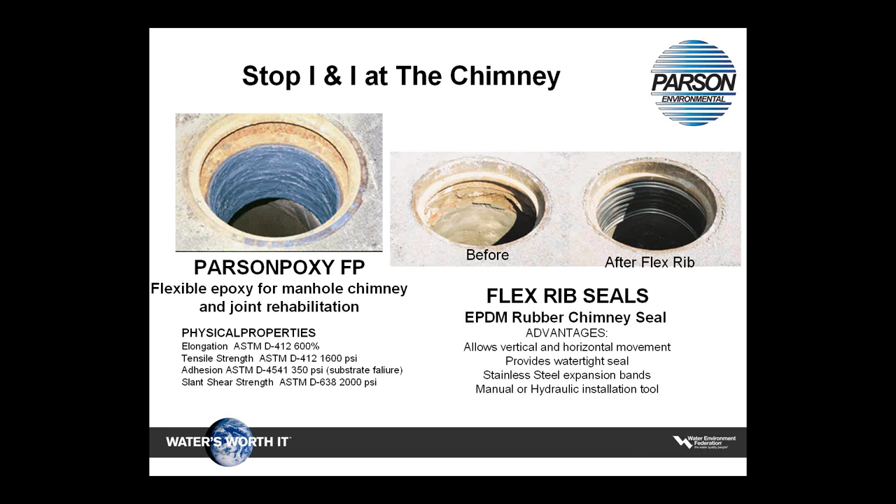Parson provides both a hand-applied and a mechanical chimney seal. Parsonpoxy FP is a brush-on, flexible epoxy urethane hybrid coating. Flex rib seals are manufactured from EPDM rubber and are installed using 2 stainless steel bands that are locked in place. We offer lightweight, compact, cost-effective application equipment for all of our rehabilitation products.

Our Pro 50 starter package is all electric and capable of gun spraying any of our cementitious linings. The mortar spinner can also be used with this equipment. Our epoxy sprayer is used to spray or spin cast Parson Epoxy SCL 80. The grout pump is electric and used to inject Parson Hydro Grout and Perma Seal. Our company also offers several accessory items for manholes.